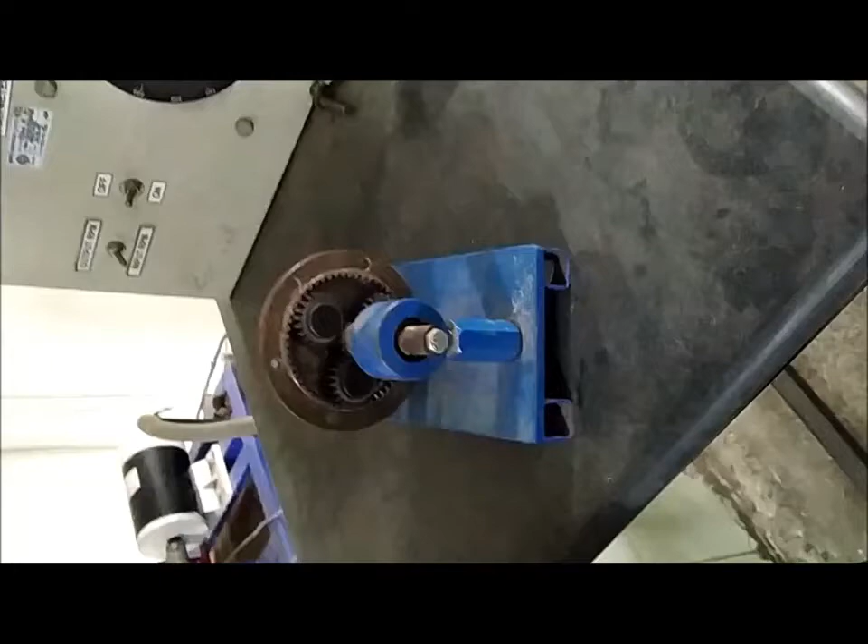Okay, this is the setup of an epicyclic gear train. There are two shafts. One shaft is here, another shaft is here. This shaft is supported in this bearing, and this shaft is supported in this bearing.

Okay, now we will separate it to understand the arrangement. So I will remove this nut.

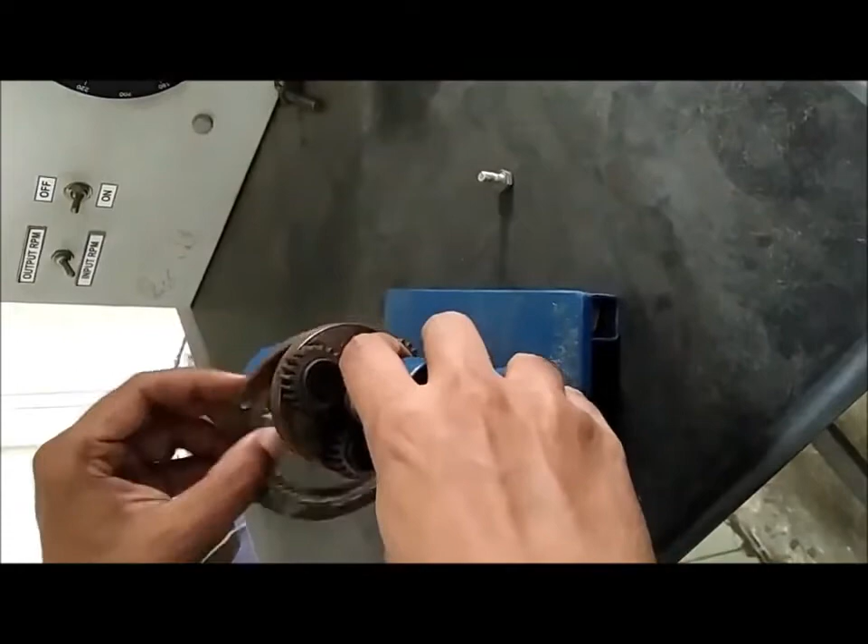So this shaft is supported in this journal bearing. Okay, I can take it out. So it is supported here, and this gear is the sun gear.

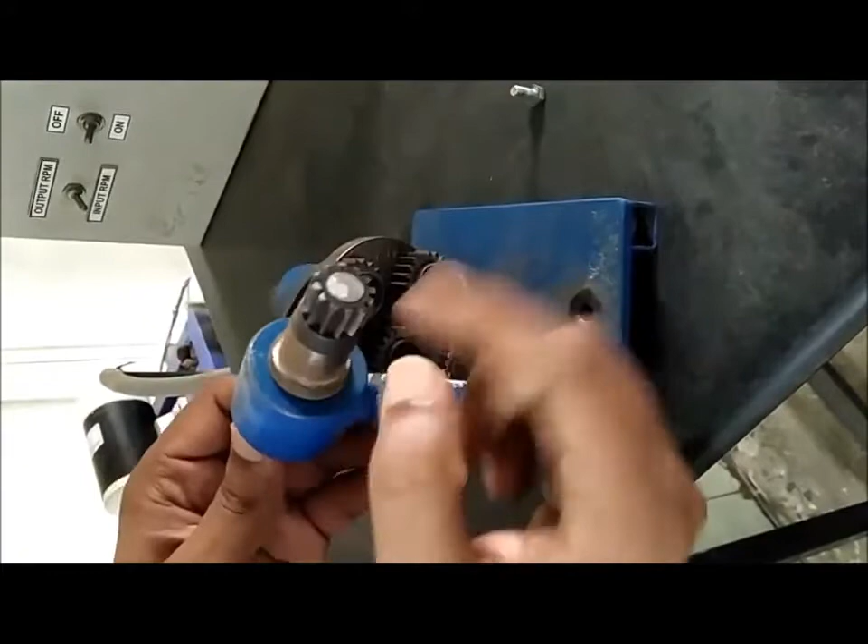Whenever this shaft rotates, that sun gear will also rotate, because the sun gear is mounted on this shaft with the help of a key and keyway. The key is there, the keyway is there, and this part is also having a keyway.

So we will mount it. Whenever this shaft rotates, this gear, which is the sun gear, will also rotate.

Now we'll focus on this remaining part. This shaft is mounted in this journal bearing, and it can turn like this. So I will take it out.

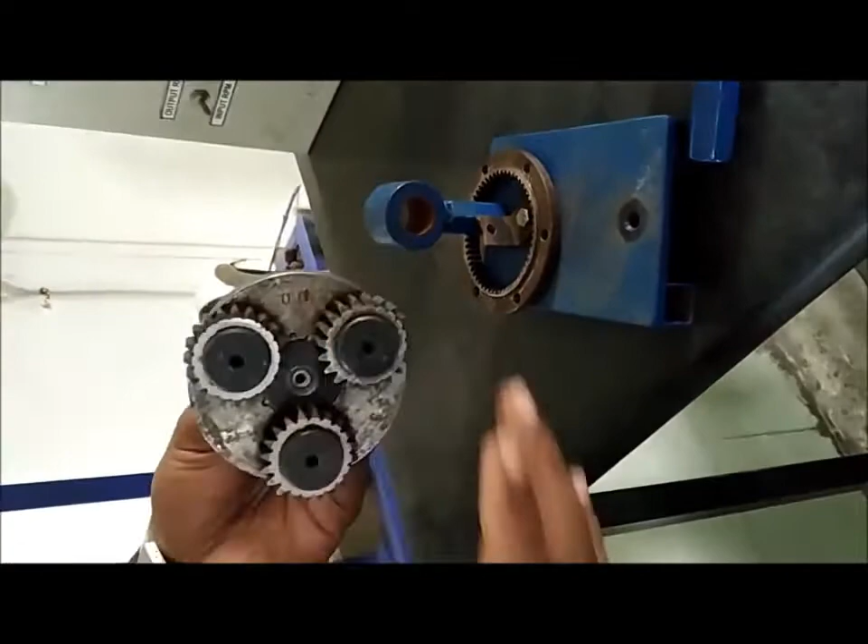Now you can notice, what is this part? This is the arm, or planet carrier.

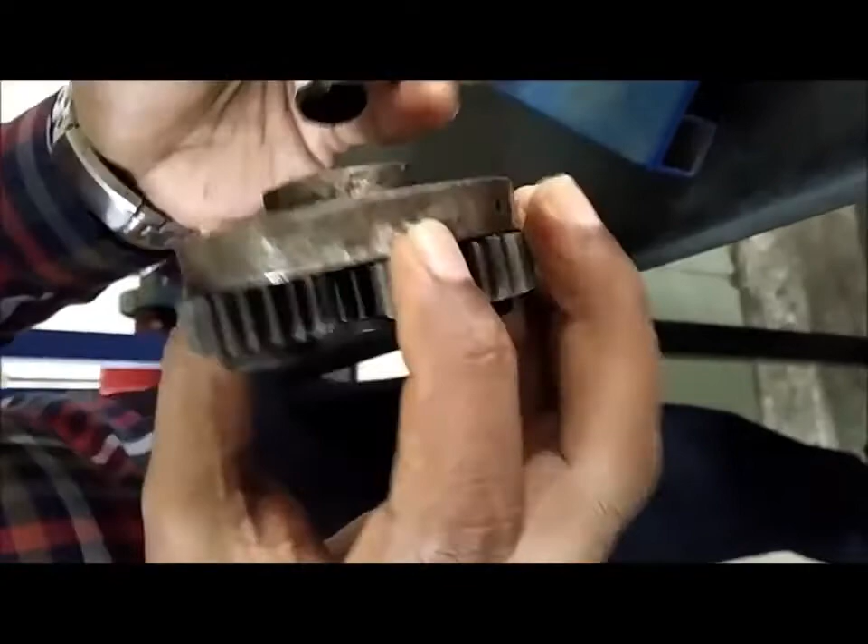How is it mounted on this shaft? With the help of a key and keyway arrangement. This shaft has a keyway and a key is inserted, and this arm or carrier also has a keyway. So this is how the arm or planet carrier is mounted on this shaft.

These are planet gears. What does this disc represent? This disc is part of the arm or planet carrier. There are 3 planet gears which can turn freely on the pin.

So we can notice this arrangement. Planet gears can turn freely on the pin of the arm, and the arm is mounted on this shaft, which is supported in this bearing.

So what kind of arrangement are we having? This sun gear will mesh with the planet gear, and these planet gears are going to mesh with this ring gear.

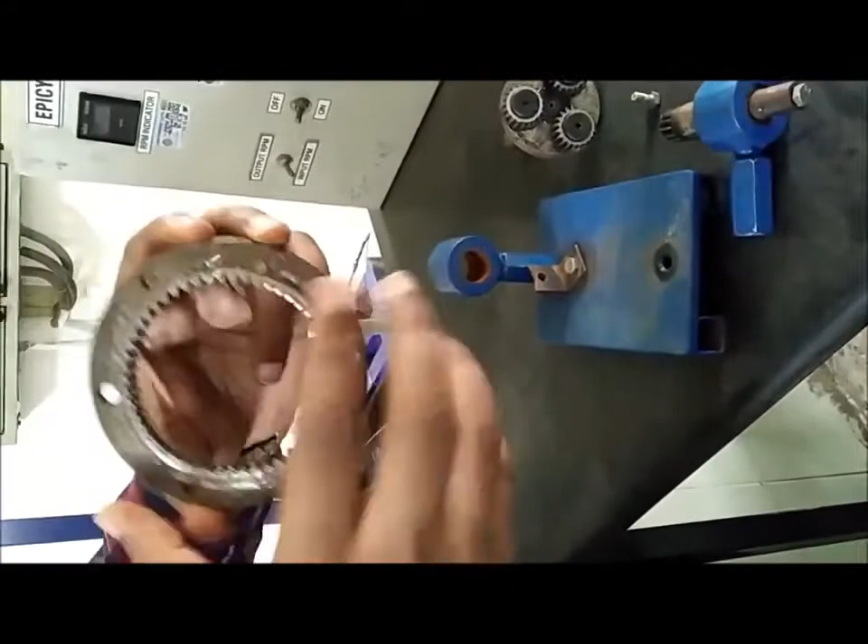This ring gear has internal teeth, you can notice them, and this ring gear will mesh with the planet gears. At the center there will be the sun gear. So the arrangement will be like this.

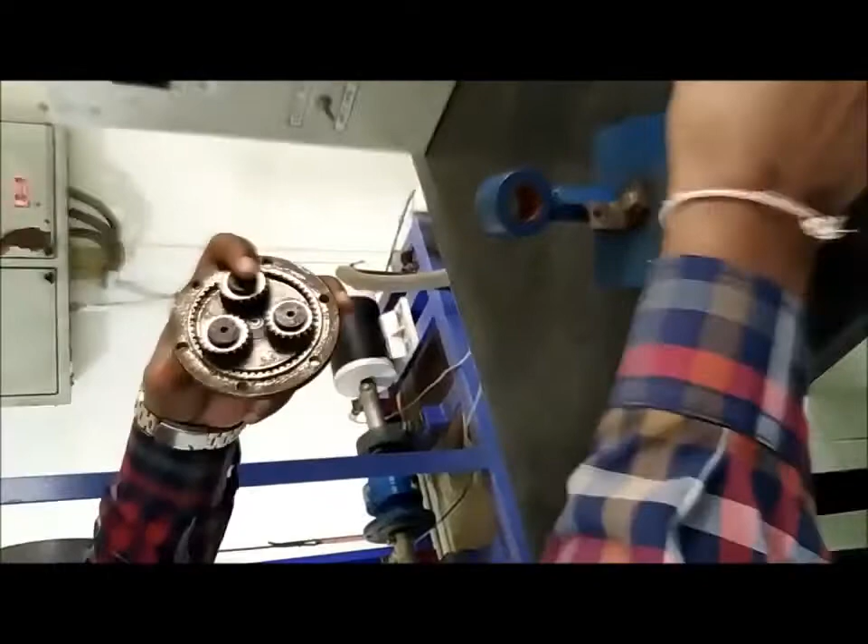Now we will mount this arrangement. Once again, just observe it properly. This is the arm or planet carrier, shaped like a disc, which has 3 pins, and on those 3 pins the planet gears are mounted. These planet gears can turn freely.

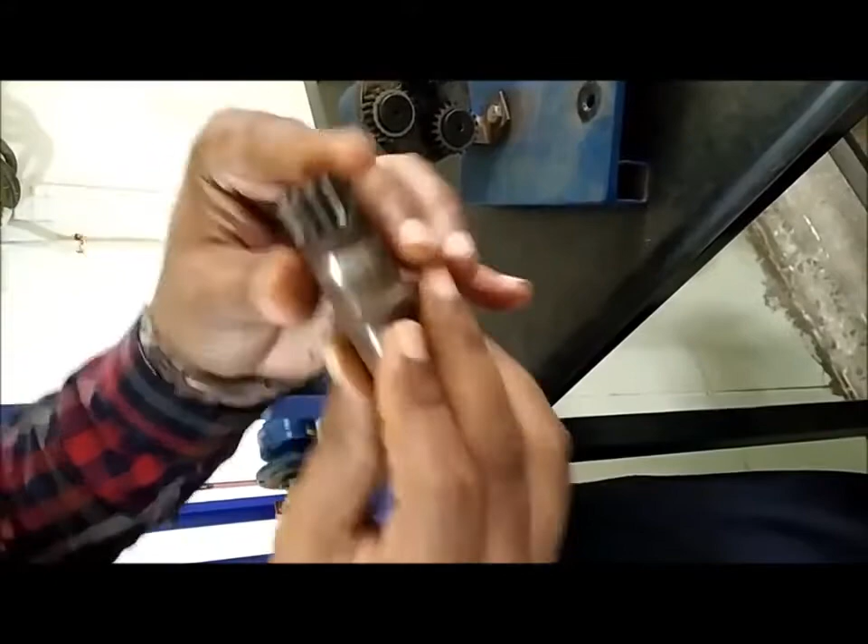Now I am going to mount this shaft in this journal bearing, and now we will focus on another shaft. Here, this is the sun gear. It is mounted on this shaft, and this shaft will be supported in this bearing.

Before that I will also insert this ring gear here. Now I will mount it in such a manner that this sun gear will mesh with the planet gear. Now I will mount this arrangement.

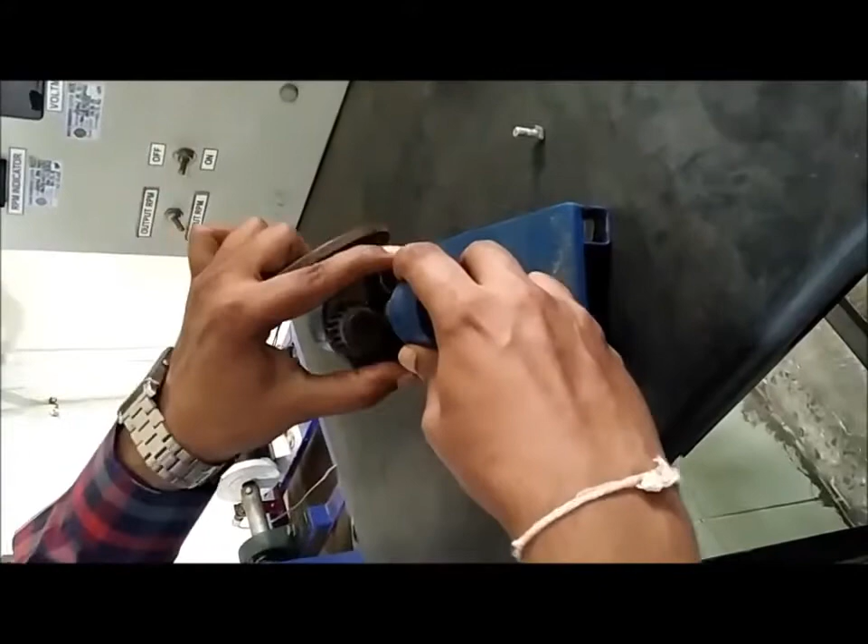Okay, wait. The sun gear is mounted on this shaft. Wait a minute. This sun gear is going to mesh with the planet gear, and now I will tighten this support.

So the arrangement is like this. The sun gear is mounted on this shaft. It is meshing with the planet gears. The planet gears are mounted on the arm or planet carrier, and this ring gear will mesh with the planet gears.

Just a minute. So this is the basic arrangement of the epicyclic gear train used in the setup. You can notice this ring gear has through holes on the periphery.

Here is a hole, here a hole is there, here also a hole is there. So like this, how many holes are there? 6 holes are there on the periphery of the ring gear.

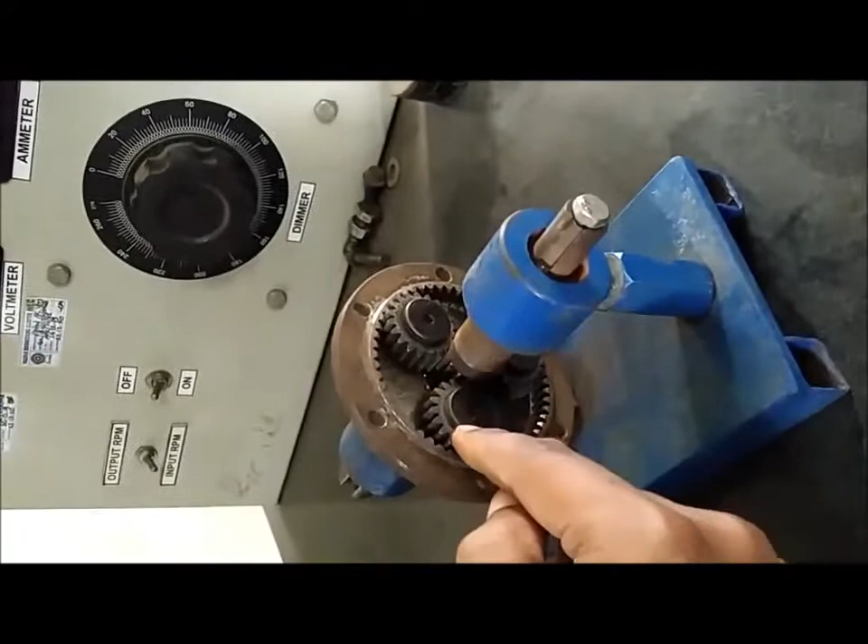Okay, so I hope the arrangement is clear. So once again, the sun gear is mounted on this shaft. These 3 planet gears are mounted on the pins of the arm. Where is the arm? The arm is this disc which is mounted on this shaft.

The sun gear is meshing with the planet gear, which is meshing with the ring gear. This is the basic arrangement. So this is our setup of an epicyclic gear train. We will come here. You can notice the arrangement.

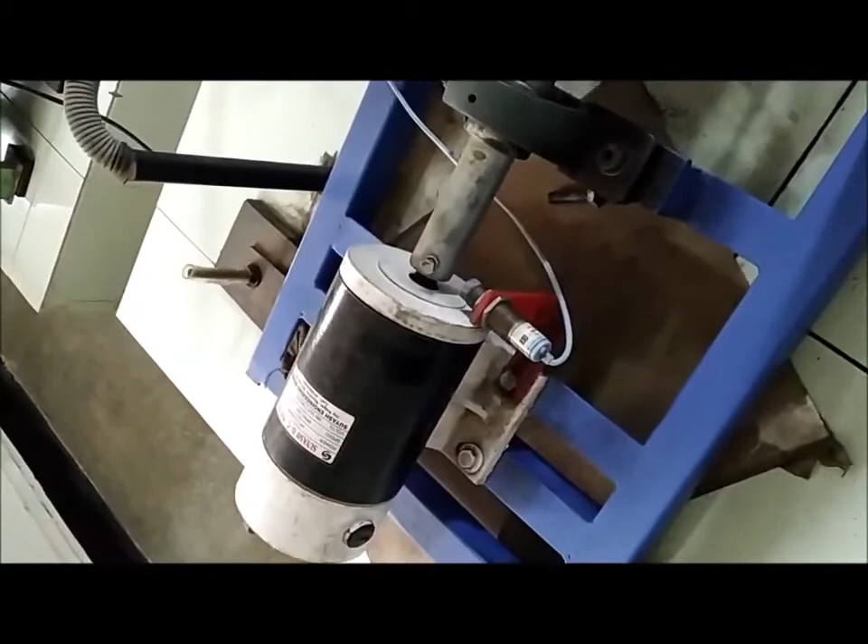Okay, so in this setup, here you can notice there is a motor, and the shaft of the motor is connected to this gearbox. Now, this is an epicyclic gearbox. How can we say it is epicyclic? Because we have already seen this kind of arrangement previously.

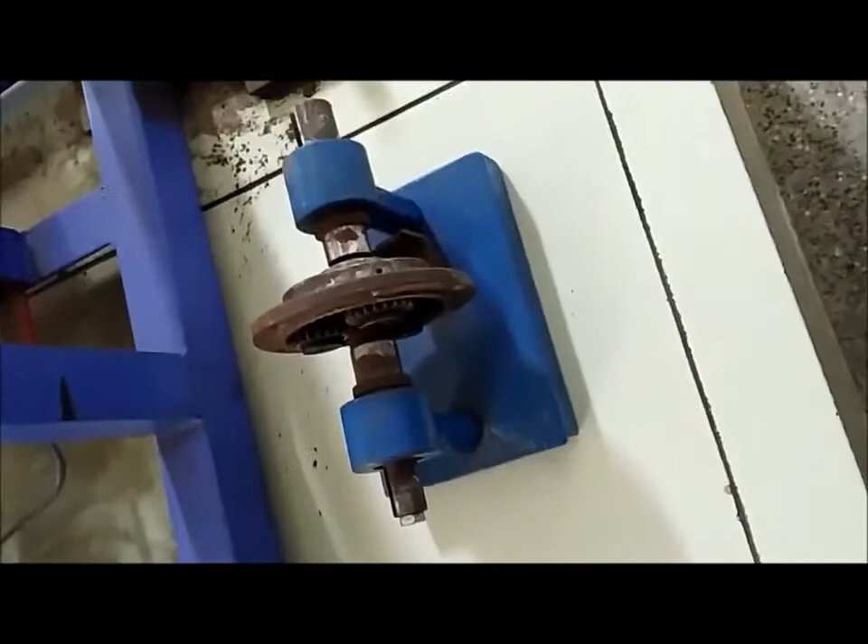On this shaft there is a sun gear. The sun gear is meshing with the planet gear, and the planet gears are meshing with the ring gear, and the ring gear is mounted here. In that arrangement ring gear was here, but in this gearbox, where is that ring gear?

At the center you can notice this thickness. At the center there is a part, and here also you can notice this thickness. This thickness and this thickness are the same, meaning this ring gear is here.

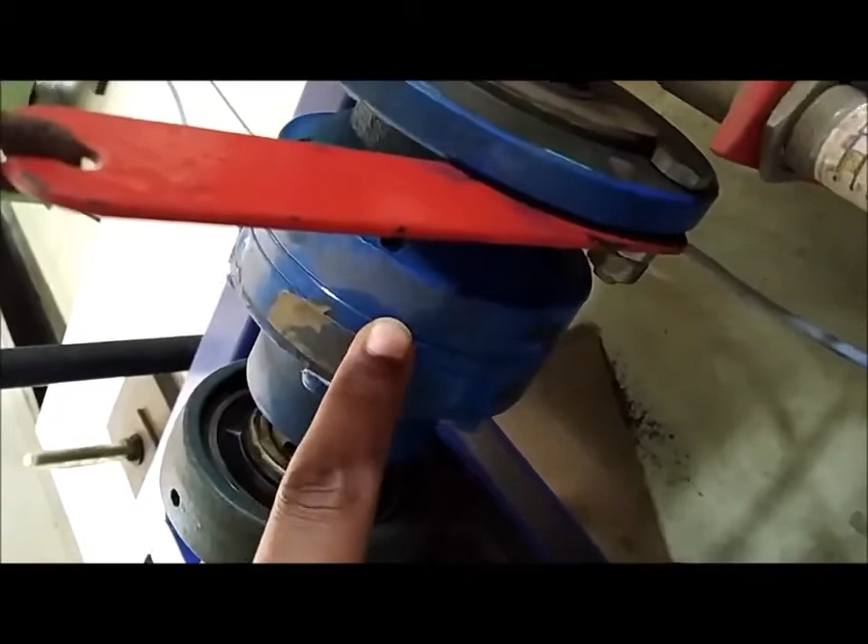And it is sandwiched between two parts of the casing. This part of casing is there, this part is also there. So there are two separate parts of the casing.

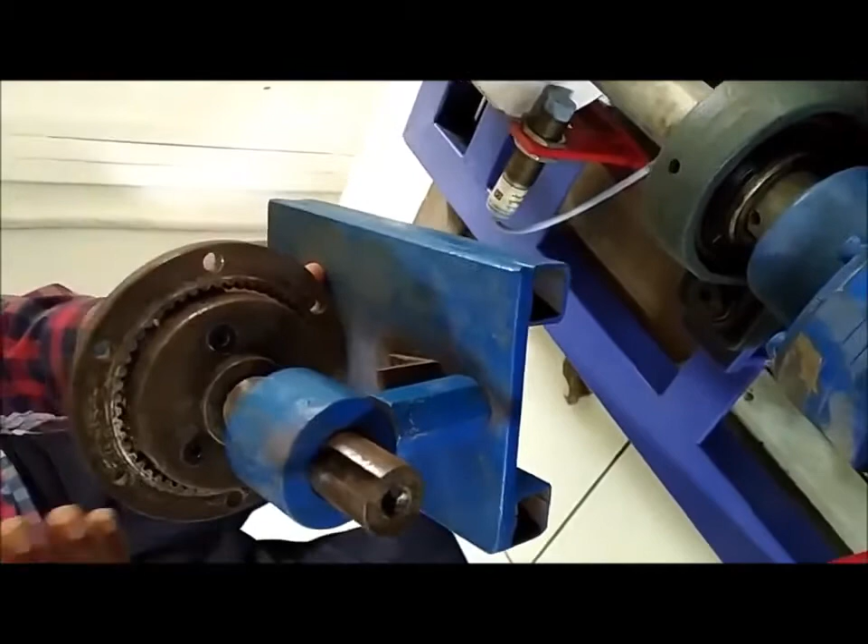We have already seen that this ring gear is having through holes at the periphery, just like a flange-like arrangement with through holes. How many holes are there? There are 6 holes, we have already seen it.

Now the same ring gear is here. It is sandwiched between two parts, and these two are the parts of the casing. Here you can notice there is a bolt. How many bolts are there? 1, 2, 3 - if you observe properly, there are 6 bolts.

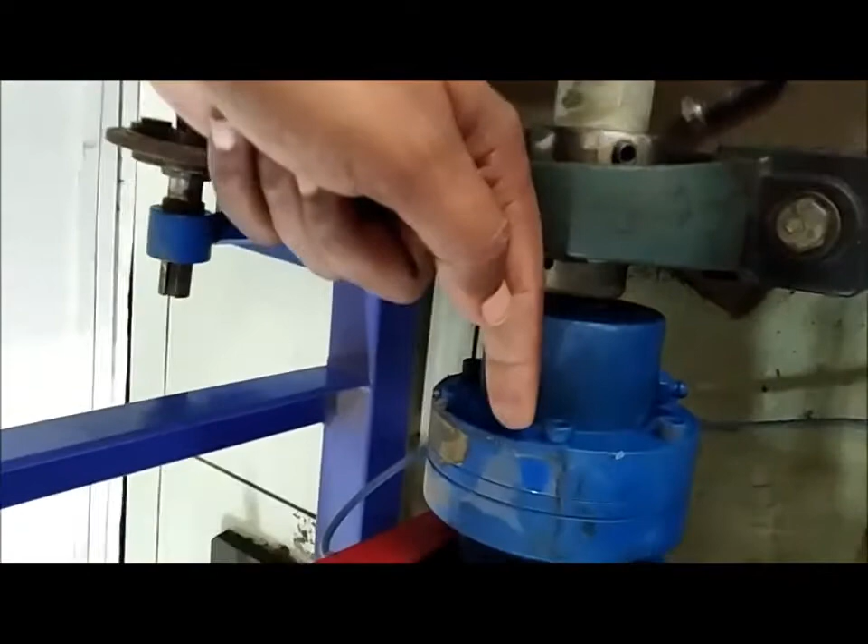Now how is this arrangement? The bolt is inserted, so first it will pass through this part of the casing, then it will pass through the ring gear, then that bolt will pass through the next part of the casing. So like this, how many bolts are there? There are 6 bolts.

Now try to understand the arrangement. What will happen due to that, with this ring gear and this casing? What is the purpose of this casing? The casing is there because we can insert some lubricant inside it, and that casing is connected to the ring gear, meaning relative motion between ring gear and casing will be zero.

Why will it be zero? Because the bolt is directly inserted through the casing, through this ring gear, and through another part of the casing. And you can notice the same part continues here, and this part is also having a number of holes. How many holes are there? There are 4 holes.

So in this arrangement, if we fix this casing, what will happen? The ring gear will be fixed.

Now try to understand the arrangement. The same arrangement is there, we have already observed this setup. The sun gear is mounted on this shaft. So here also this sun gear is mounted on this shaft. Here also we have a motor, and this motor has its shaft connected to the sun gear.

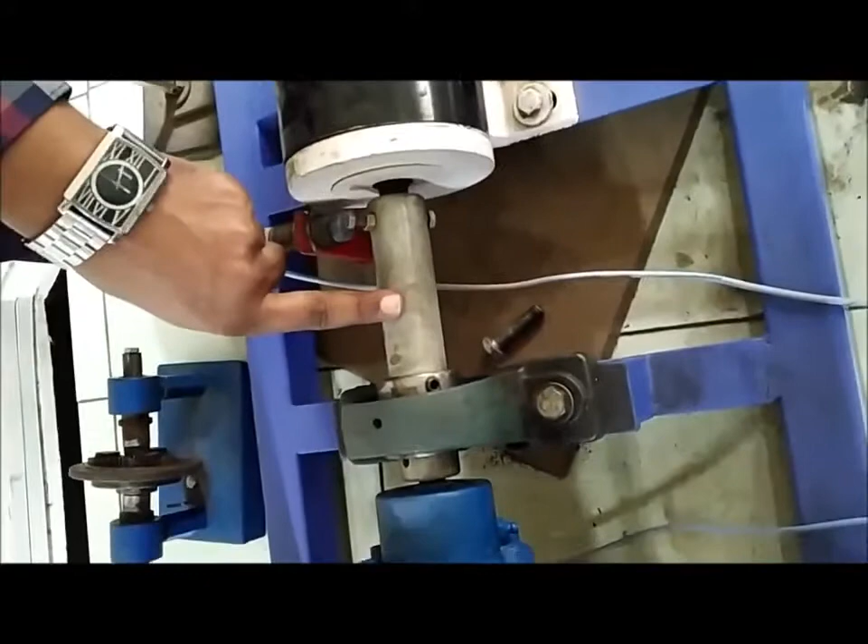Where is the sun gear? It is not visible, because right now this entire arrangement is inside the casing, so that's why we cannot see it. But the sun gear is mounted on the motor shaft, meaning we have given input motion to the sun gear.

The sun gear is meshing with the planet gear. How many planet gears are there? There are 3 planet gears in this setup, and those 3 planet gears are mounted on the pin of the arm, and the arm is mounted on this shaft.

And where is the ring gear? The ring gear is here. The ring gear is connected to the casing, and we are going to fix the casing. To fix the casing, we have this arrangement.

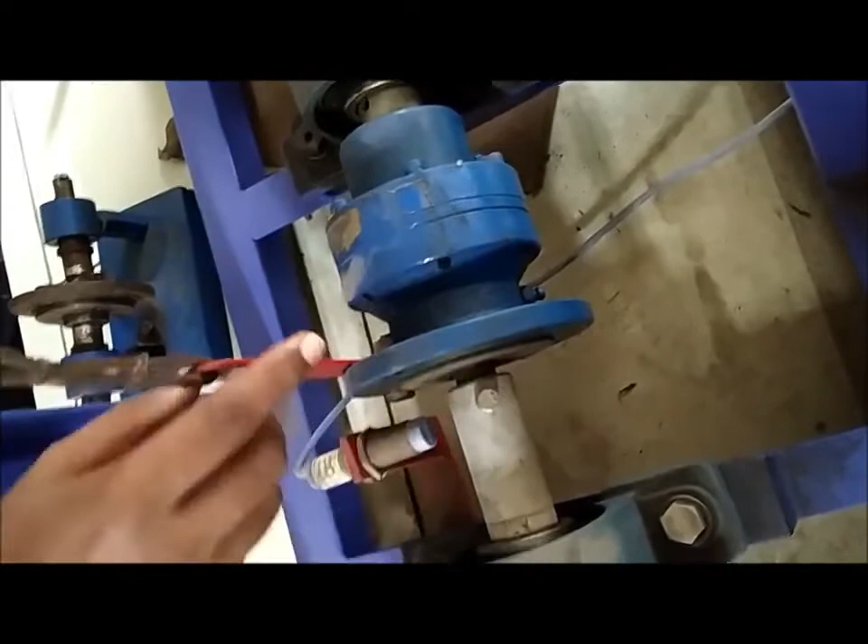So what will happen when the motor starts? You can notice this part of the casing is connected to this link, so that part will also try to turn, but as it is connected here, and this part is connected to one dial, and this part is connected to the frame, this will not rotate. This casing will not rotate, so in turn, the ring gear will not turn.

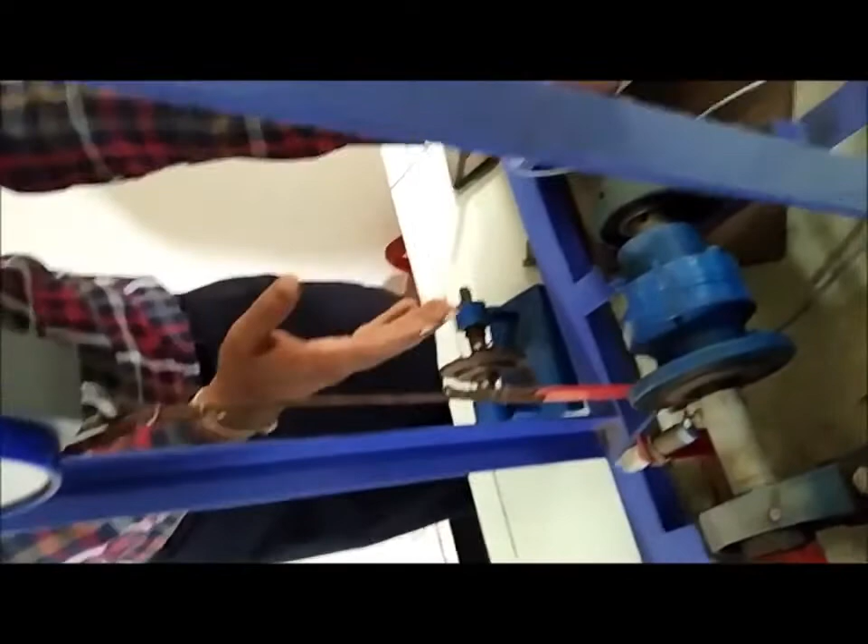Okay, so once again, a basic arrangement. Where is the sun gear? The sun gear is mounted on the motor shaft. Where is the arm or planet carrier? The arm or planet carrier is mounted on this shaft, and on the same shaft there is a drum. Where is the ring gear? The ring gear is here, so in this arrangement we are going to fix the ring gear, and that's why we have this arrangement.

Okay, so now we will observe this panel. This is a 2 position switch. Now it is off. I will move it in downward direction. Now you can notice that the motor is rotating.

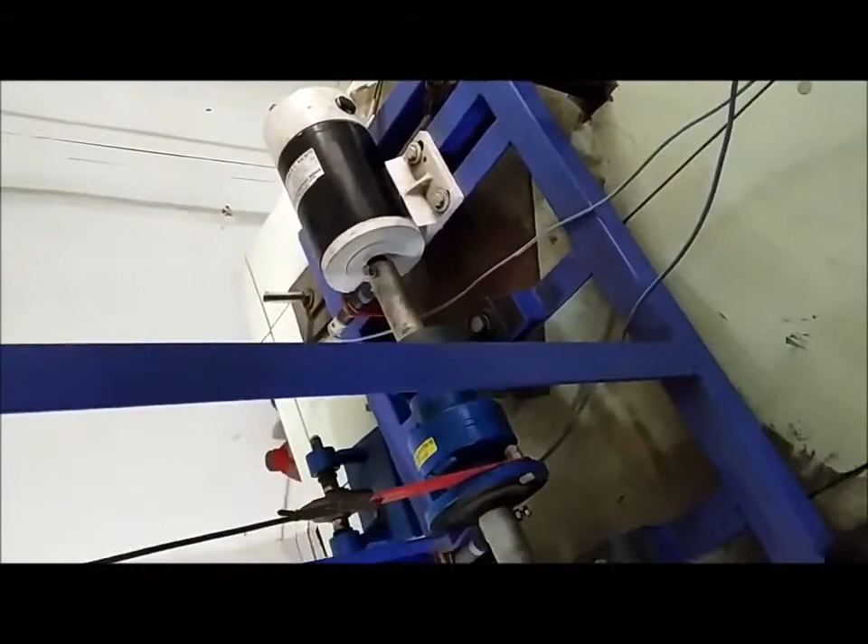Yes, the motor is rotating, and the output shaft is also rotating, both at different speeds, as you can notice. Even if it's not obvious by observation, it will be clear from the reading. This is the dimmer knob, so we can increase voltage, and you can notice the speed is increased.

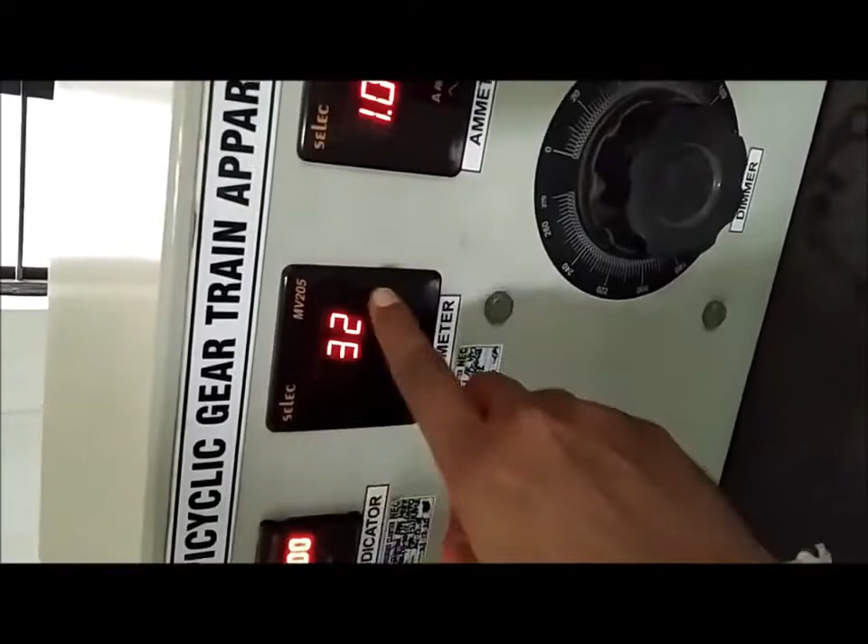Now from this voltmeter we will get information about voltage, how much voltage the motor is having, and how much current is there. So that information we can have from this panel.

Now you can notice one more panel here, the RPM indicator. From this display we will get information about RPM, but how will we get that information?

You can notice there is a switch. It is a 3 position switch. Now it is at the center position. If I move it in downward direction, now you can notice we are getting some speed, and it is the speed of the input shaft. Now how it is working, you can notice this light is blinking.

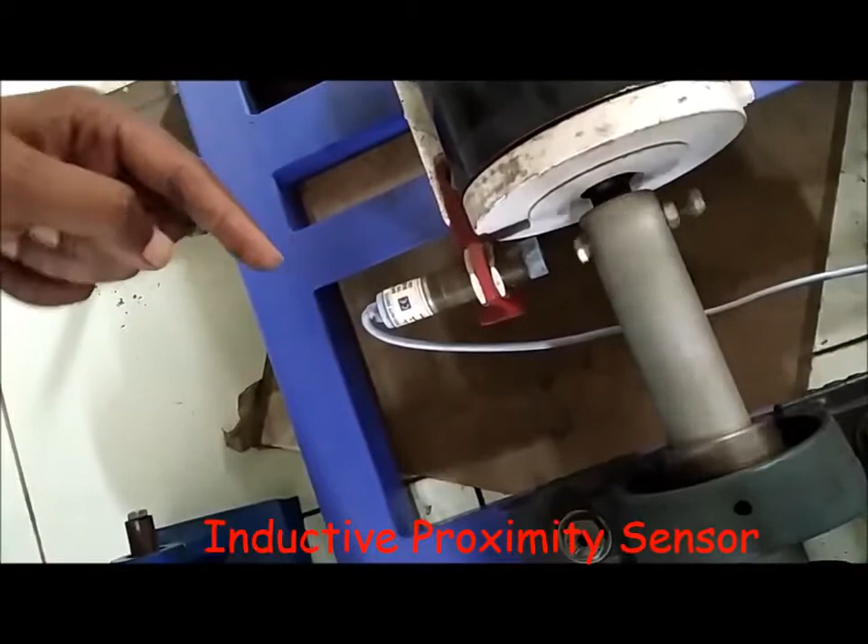It is a proximity sensor, and on the shaft there is a bolt. So whenever that bolt crosses, whenever that bolt passes in front of that sensor, this light will blink. And this arrangement is used for measuring speed.

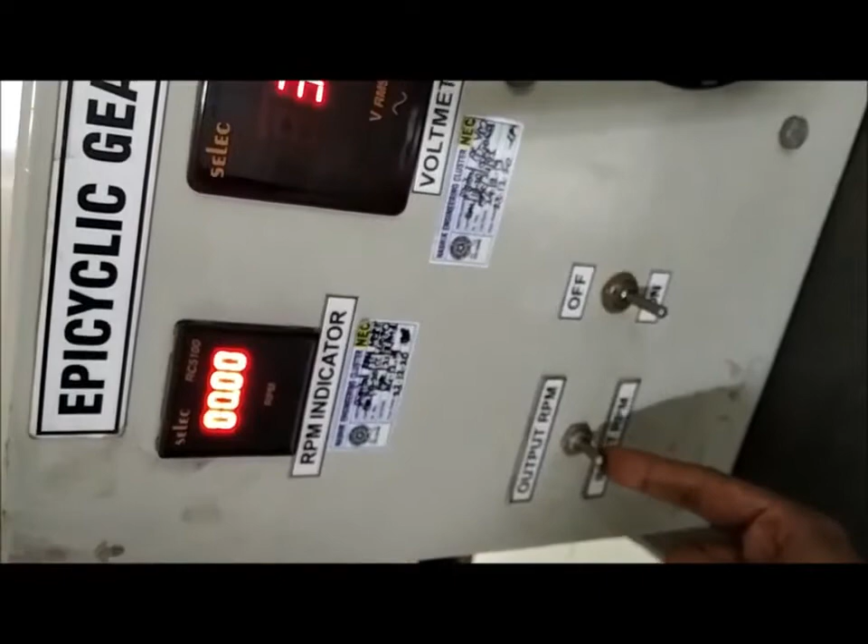If we want speed at output, we will move this switch here. Now here speed is 0. Why is it 0? Because now it is at the center position. Now we will move it in upward direction. Now here we should get speed at output. You can notice 45 RPM is the speed, and it is the speed at output.

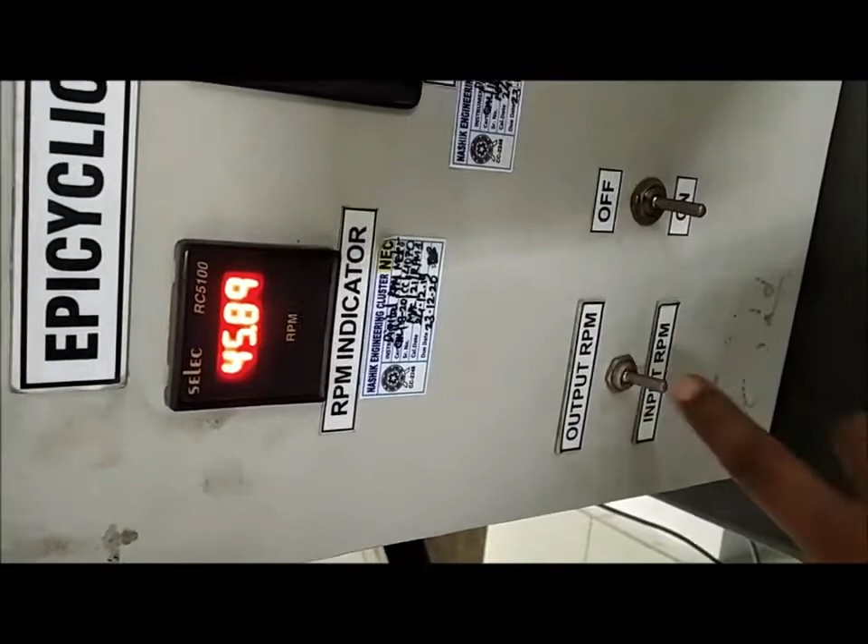You can notice here we are having a proximity sensor. Whenever that bolt crosses that sensor, this light will blink, and this information of speed is displayed here. Now you can notice speed at output is 45 and speed at input is...

Sorry, not 147, it is 255.6. Here also you can notice by observation, input shaft is rotating faster than output shaft. Yes, input shaft is rotating at higher RPM, but output shaft is rotating very slowly.

So why is this variation there? Now you can notice whether this casing is rotating. No, that casing is not rotating, it is fixed. Input is given to the sun gear, casing is fixed, and output is taken from the arm.

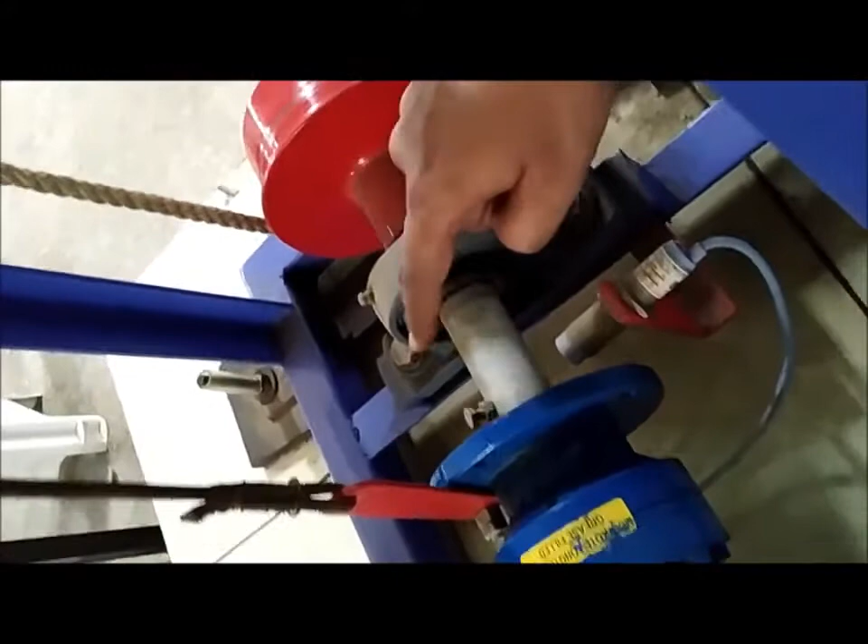So this is the arrangement, and on the same shaft, what is this shaft? This is the shaft on which the arm is mounted. Now you can notice on the same shaft there is a drum. So you can observe this drum. So this drum is here.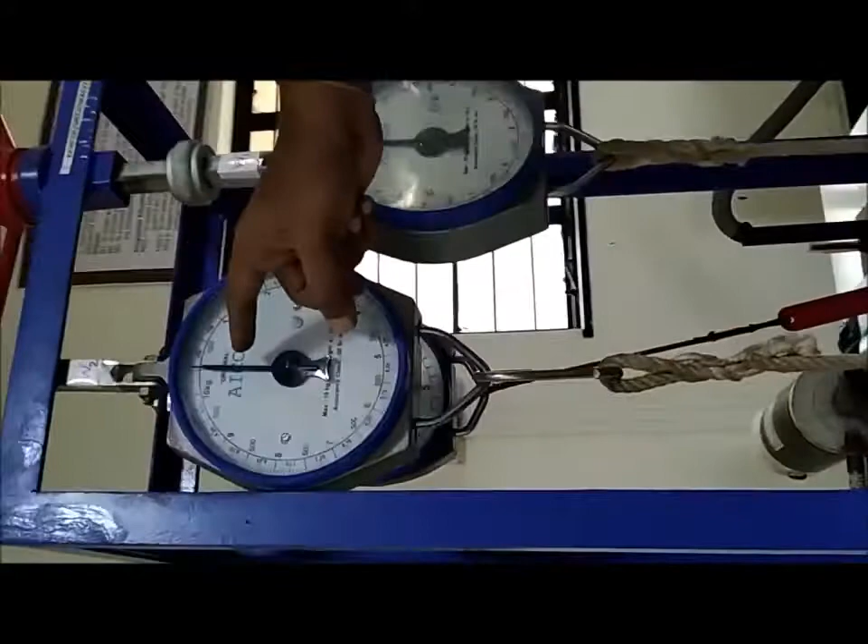And you can notice there is a rope. One end of the rope is connected to this dial. This rope is wrapped around this drum. Another end of the rope is connected to this dial, and this dial is connected to the frame. Now here you can notice what is written, W1, meaning from this dial whatever reading we get, we will use the notation W1. And from this other dial whatever reading we get, we will use the notation W2.

So where is this drum mounted? This drum is mounted on the output shaft. And where is the output shaft? The output shaft is that shaft on which the arm or planet carrier is mounted.

So how can we get torque at output? Obviously this rope arrangement is there, the drum is there. So whenever we operate this nut, now you can notice this dial is connected to this part. This part is having thread, and here a nut is there. This red color part is the nut, and we can turn it.

And whenever we turn this nut, you can notice what will happen. This part is moving, moving in upward direction. So what will happen to the rope? The rope will be pressed against this drum, and here we will get some reading.

Okay, so this is how we can have W1 reading and W2 reading. By using these readings, we can find out output torque. How to find it, that we will discuss.

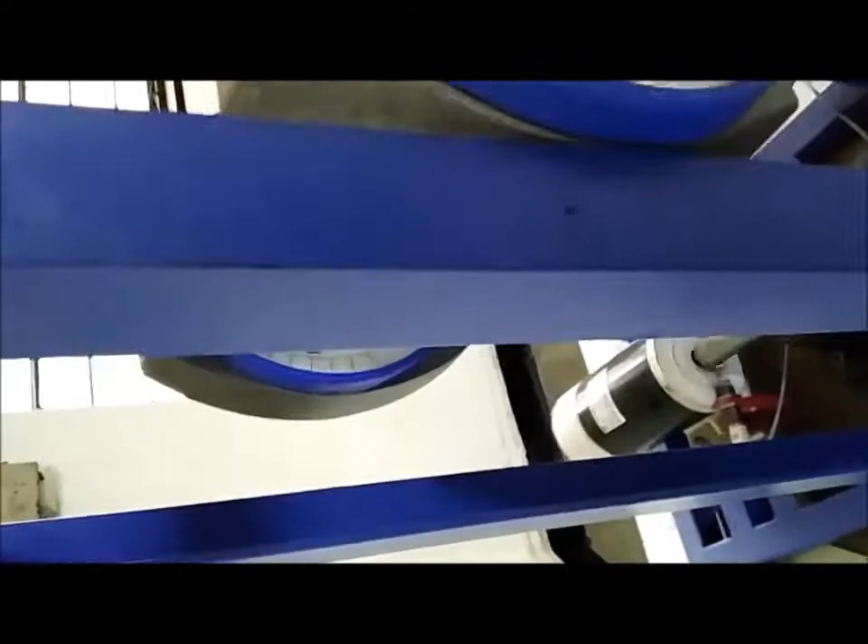Now here you can notice one more dial is there. This dial will give us reading S. So whatever reading we take from this dial, for that we will use notation S.

Now from where we are getting that reading, you can notice there is a string, and it is connected to this link, and this link is connected to this part. And where is this part? This is actually part of the casing. And we know whatever speed the casing has, the ring gear will have the same speed. Now due to this arrangement, casing cannot turn, meaning the ring gear is fixed. For that we are having this arrangement.

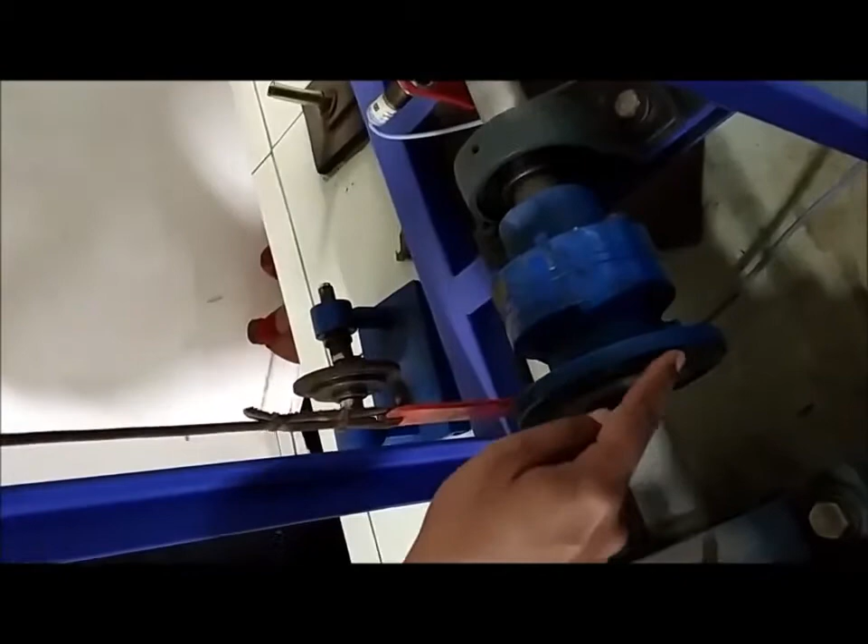In reality, the ring gear or this casing will be connected to structure, will be connected to a fixed link or will be connected to ground. But here, as we are interested in the reading of holding torque, that's why we have this next part to which this red color link is connected, with the help of a bolt. So due to this, the casing cannot turn. And how much tension will be there in this, or how much force will be there, that information we are getting from this dial, and for that we are using notation S.

So the title of this experiment is Speed and Torque Analysis of Epicyclic Gear Train to determine holding torque.

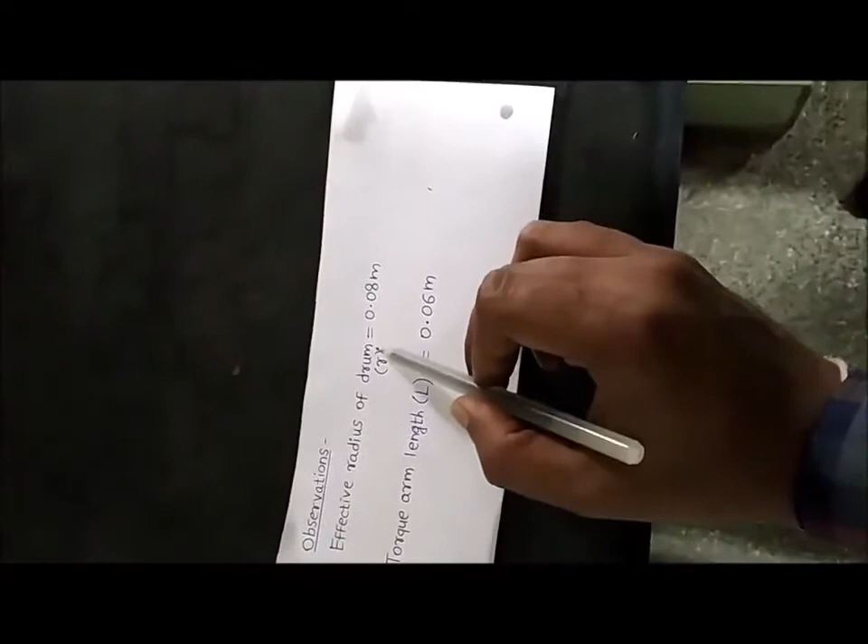Now we will go for observations. Here effective radius of drum is written, and for that the notation used is small r, and it is equal to 0.08 meter.

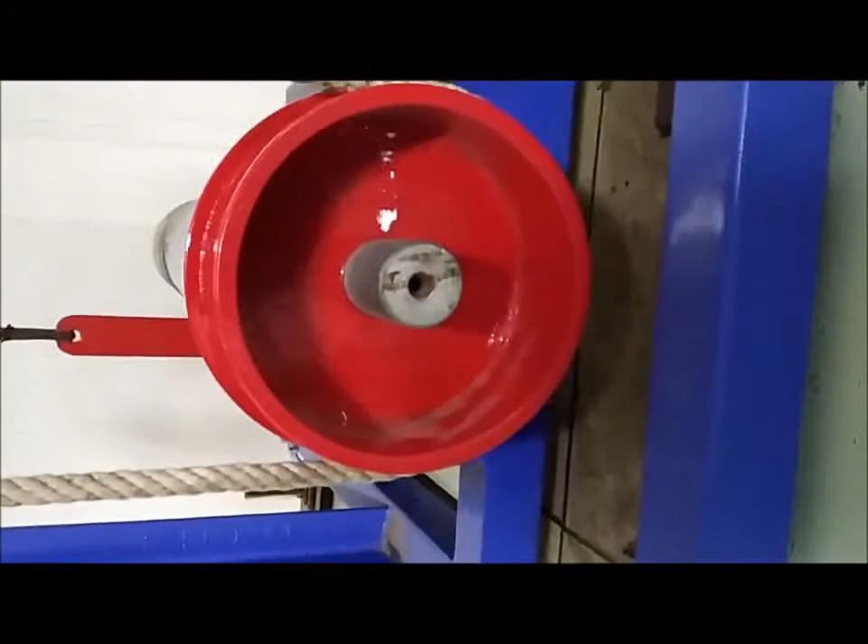Now it is the radius of which drum? In the setup, we have already seen this drum is there. It is mounted on the output shaft, so this is the radius of this drum. So what we have written, effective radius of the drum, means it will be radius of drum plus radius of this rope. So that total distance is given, and how much is it? So what is effective radius? Radius of this drum plus radius of this rope, and it is 0.08 meter. Now next term is also there, torque arm length, for that notation used is L.

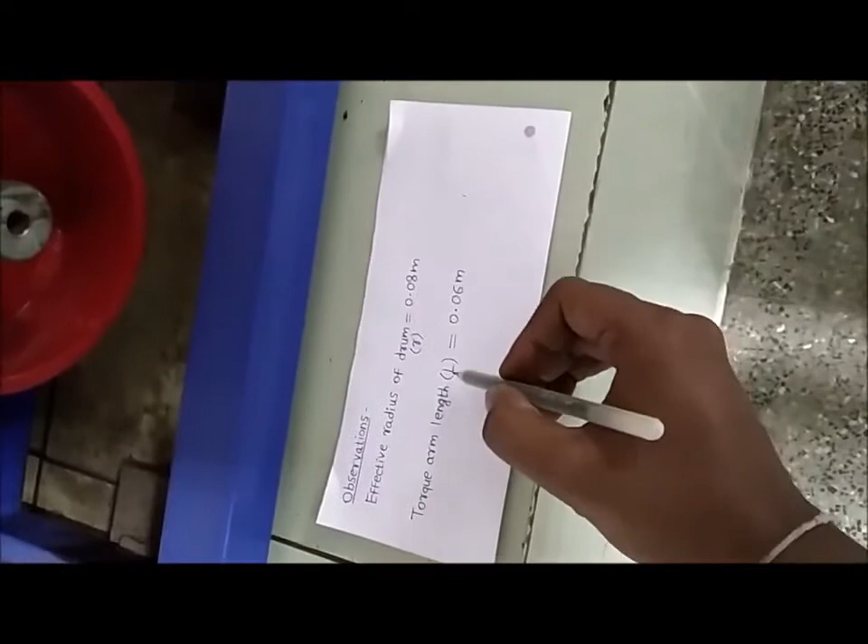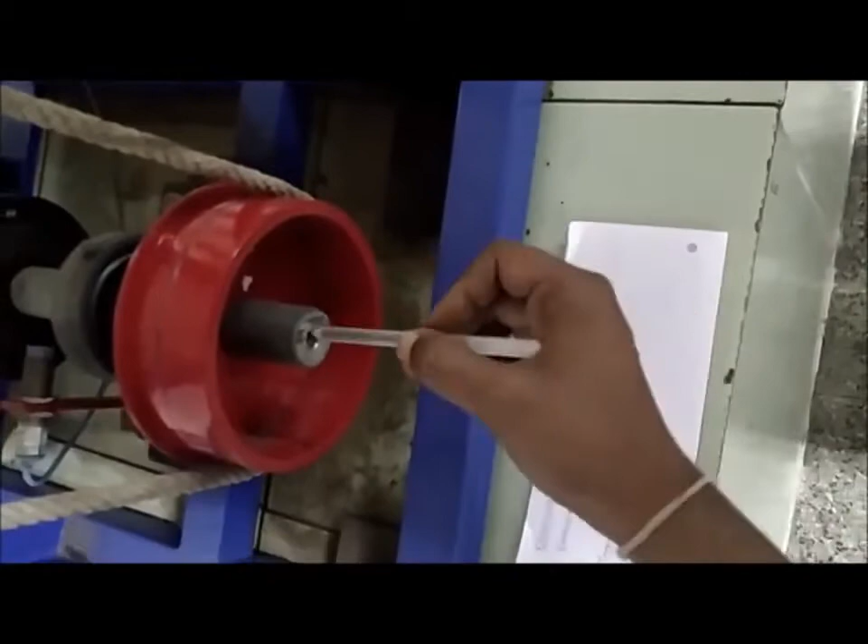And it is 0.06 meter. Now it is in meter, and previously what we have seen, effective radius of drum, it is also in meter, meaning in centimeters it will be 8 centimeters. So this radius, effective radius of drum, will be 8 centimeters, 0.08 into 100 means in centimeter it will be 8 centimeters. So torque arm length, for that we have used notation L, and it is 0.06 meter.

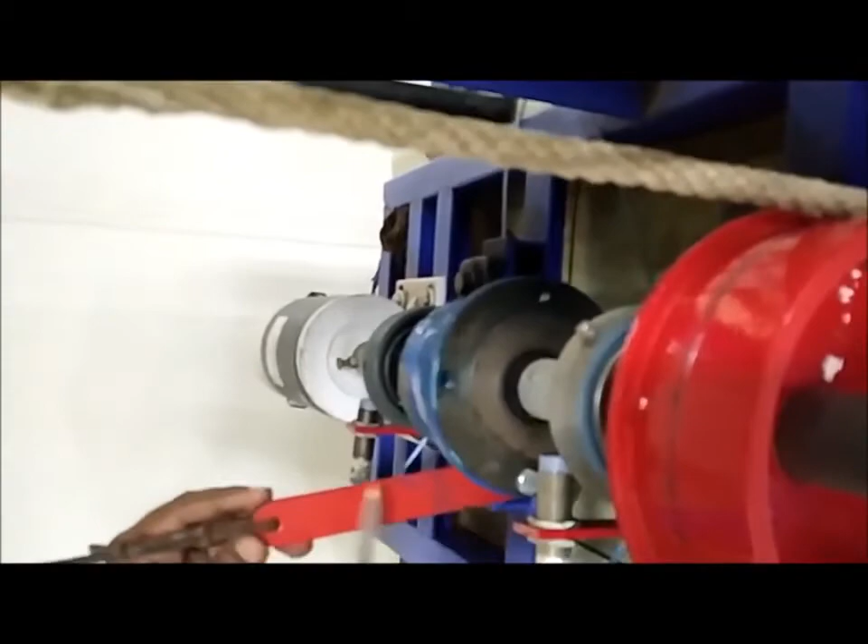Now where is that distance? Now we will observe it. Here there is an axis. This entire arrangement has one axis of rotation, and you can notice there is a link, red color link. It is connected to this string, and this string is connected to this dial, and from this dial we are going to take reading, for which we are going to use notation S.

Now where is this link connected? It is connected to fixed casing. Now why am I saying it is connected to fixed casing, because due to this arrangement, this casing cannot turn, and as the casing will not turn, the ring gear will also not turn.

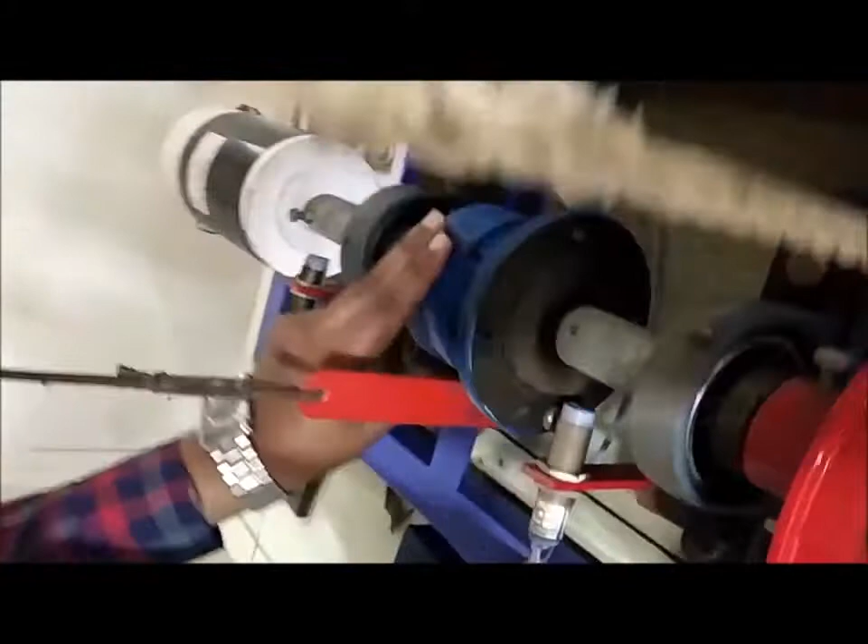So what is that torque arm length? It is the distance between this bolt and axis of rotation. So how much is that distance? That distance is 0.06 meter, meaning it is 6 centimeters.

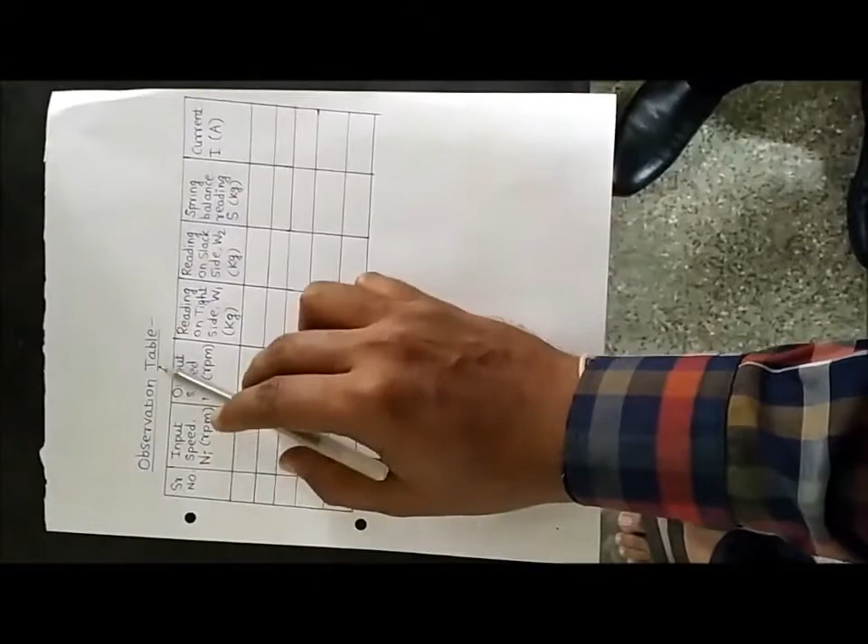Okay, now we will observe this observation table. You can notice the first column is serial number. We will take 5 to 6 readings.

The next column is input speed, for that we will use notation N sub I, and it will be in RPM. We will also measure output speed, that is our next column. For that the notation is N sub O, and it will be in RPM.

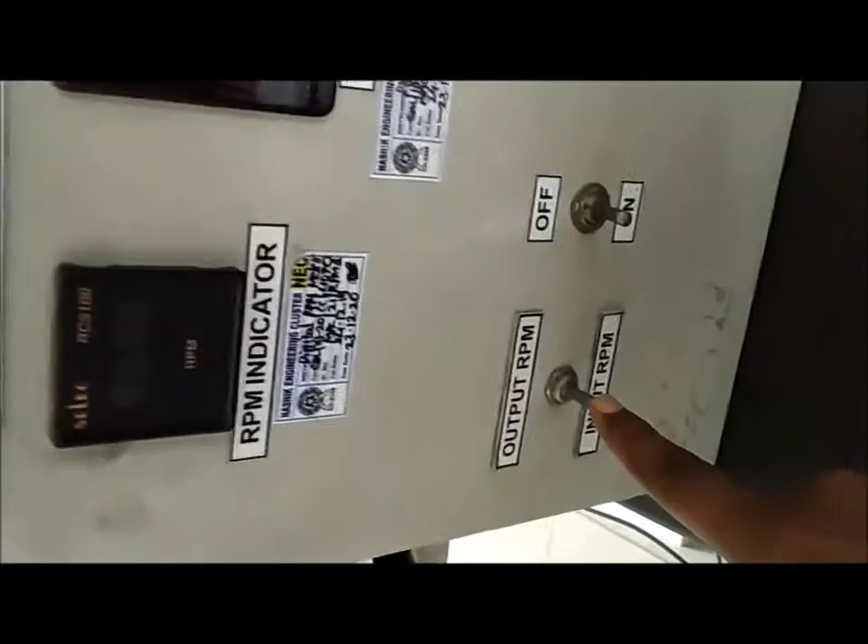So how will we measure the speed? We have already seen on this panel there is a switch. We can move it either in downward direction or in upward direction. If we move this switch downward, we will get speed at input. If we move it upward, then we will get speed at output.

In the observation table, the next column is reading on tight side. For that, the notation used is W1, and that reading will be in kg. The next column is reading on slack side, for that the notation is W2, also in kg.

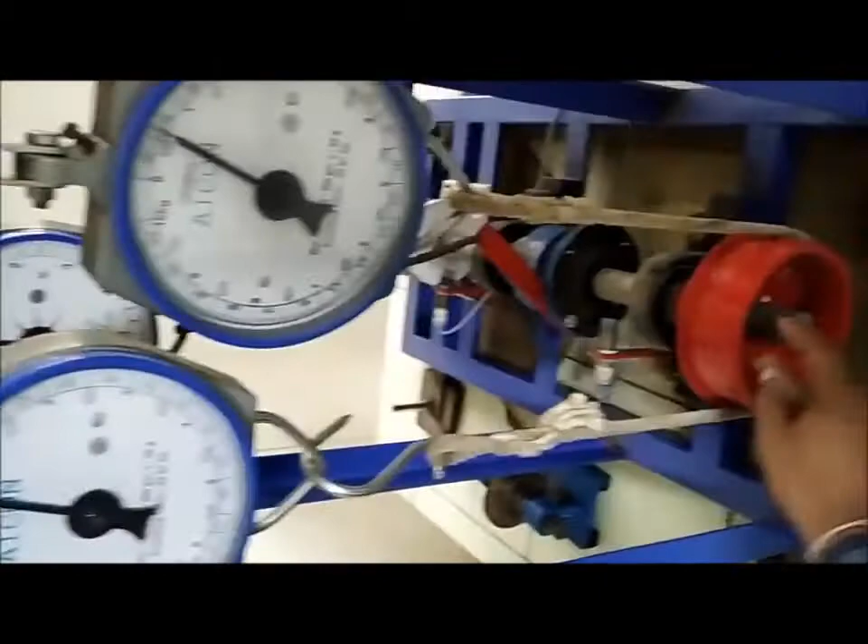Now where are we going to measure these readings, W1 and W2, reading on tight side and reading on slack side? On the setup we have already seen there are two dials. These two dials are connected to the rope, and the rope is wrapped around this drum, and the drum is mounted on the output shaft. From this dial we will get the reading for W1.

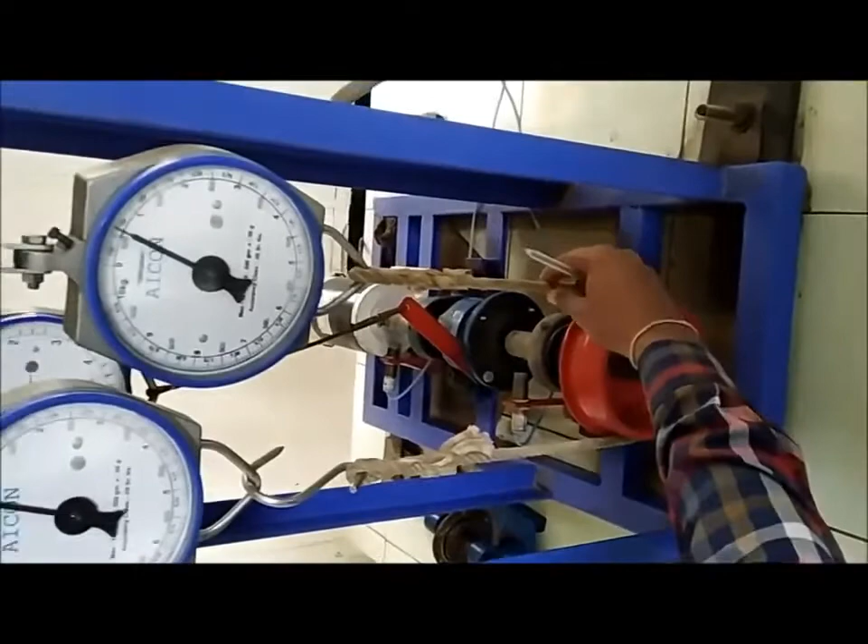Here this drum is going to turn in clockwise direction, so whatever W1 we get will be the reading on tight side. Why is it the tight side? Because the drum is rotating in clockwise sense, so obviously this will be the tight side and this will be the slack side. And here whatever reading we get, for that we use the notation W2, which is our next column, reading on slack side W2.

Our next column is spring balance reading, and for that the notation is S, and it is in kg. Now where will we measure it? There is one more dial.

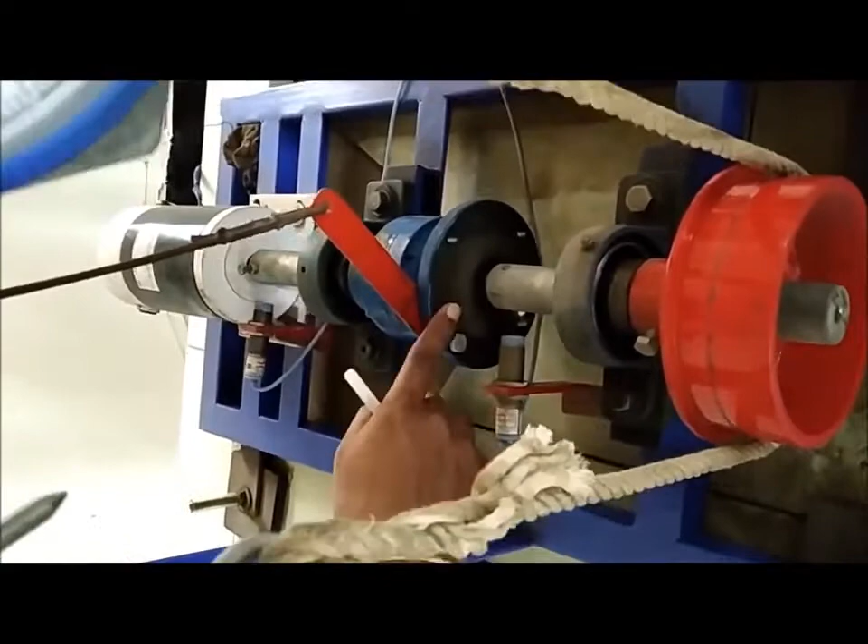We know this dial is connected to the rope, the rope is connected to the link, and the link is connected to the casing. The casing and this ring gear are just one unit, because bolts are inserted - we have already discussed it. That means whatever speed the casing has, the same speed will be there for the ring gear.

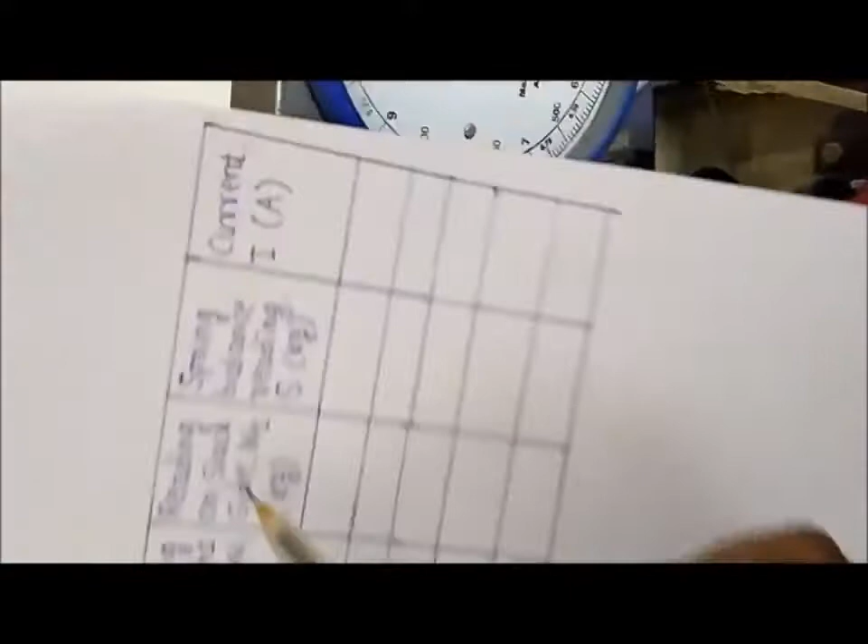But this arrangement is there to fix the casing. Due to this link, this ring gear or casing cannot turn, so it will experience some tension, or some load, and we can get information of that load here by notation S. So for that we are saying spring balance reading, notation S, in kg.

And the last column is current in ampere, and we can get that reading from this panel. Here the ammeter is, and we can get that information from here.

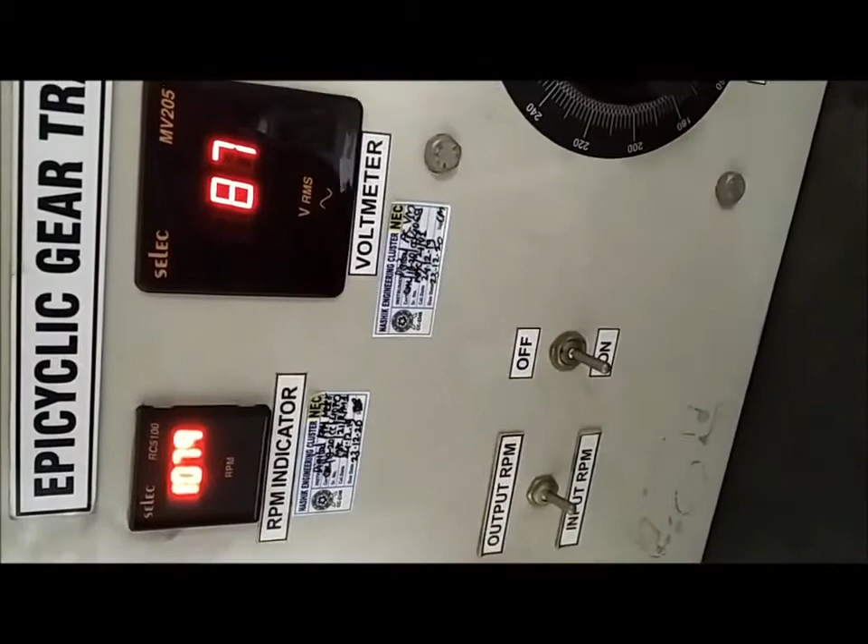Now the motor is started. Now we will observe. So our first reading is input speed in RPM. We can use this knob, move it in downward direction, and we will get input speed in RPM. To get speed at output, NO, we will move this knob in upward direction. This is how we get output speed.

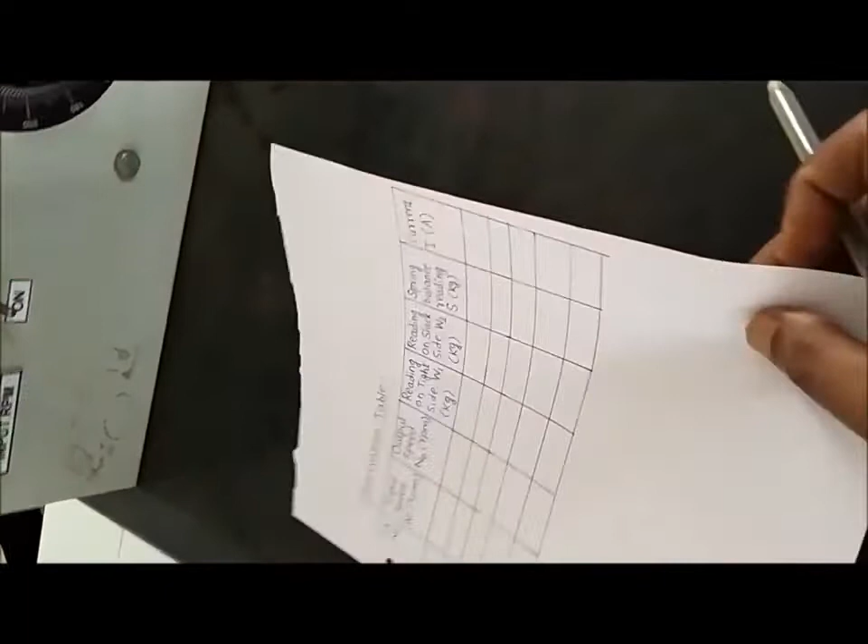Now we have to go for reading on tight side. Where are we going to get that reading? We can get that reading on this dial. But before that, we will operate this nut so that the rope will be pressed against the drum and we will have a reading.

Now, whenever I tighten it, you can notice what will happen to this casing. This is the casing. What will happen to the casing of the epicyclic gearbox, you can notice. Now I am operating this nut. Now here you can notice it has changed its position.

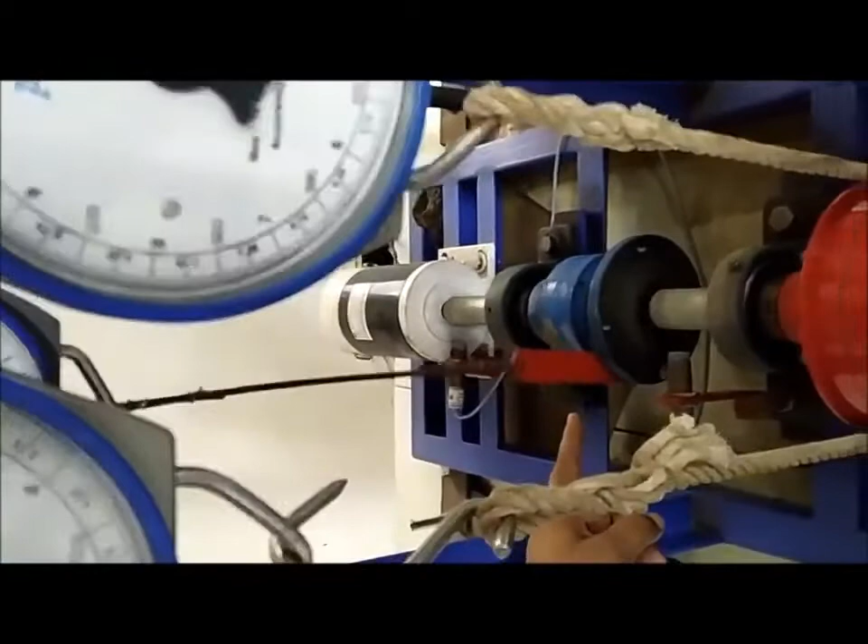Whenever we put this gearbox into some application, whenever we use it in real life, definitely the output will be subjected to some load, and due to that the fixed part will experience some load. So when we take a reading, we take it only when it changes its position, only when this casing or this link will change its position.

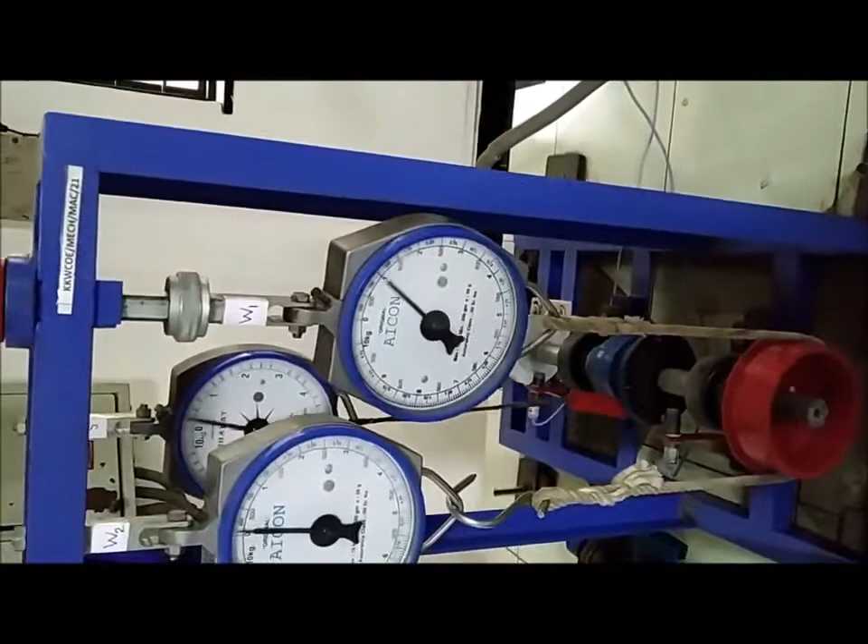Now here you can notice there are tremendous fluctuations. So what we will do, we will operate this nut. This link has already changed its position. Now we will operate this nut so that the rope will be pressed against the drum.

Now you can notice here fluctuations are comparatively less. So now we can take reading. Fluctuations are there, fluctuations will be there. Now how we will take reading? We will take value at the center. It is moving, we will take value at the center and that will be our reading.

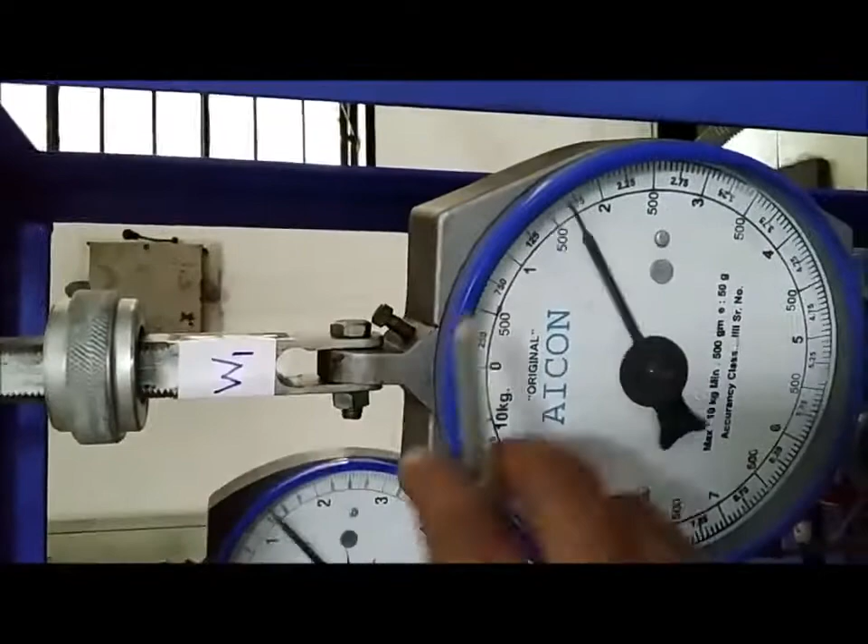Our next column is W2. From this dial we will get reading for W2, and from this dial we are going to get reading for W1. So you can observe in observation table, input speed and output speed we can take from the panel. W1 and W2 we can take from these two dials. Next is spring balance reading, which we will take from this dial.

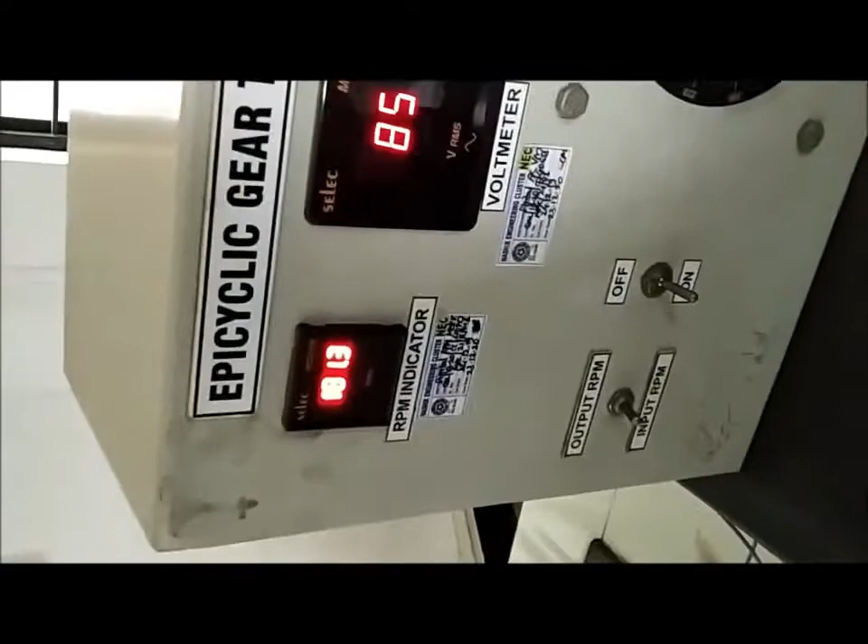And one more column is there, current in ampere. So from this display we will get that information. So this is how we will take reading. Now this is our first reading.

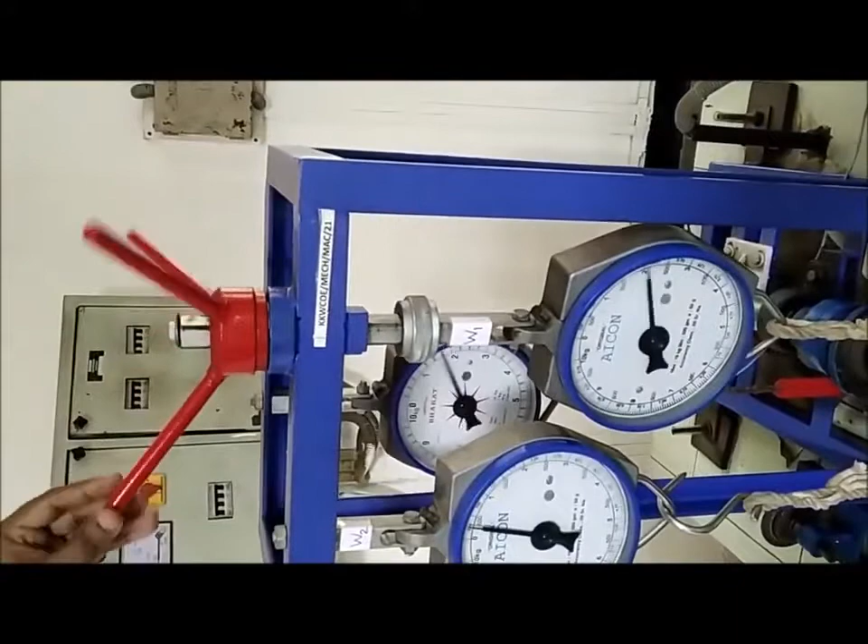Now how we will go for next reading? This nut is there, we will operate it further. So that rope will be pressed against drum, and here we can take reading for W1, then we can take reading for W2, we can take reading for S. And from here we can take reading for input speed. And if we will move this knob in upward direction, we can take reading for output speed, and we can even take reading for current.

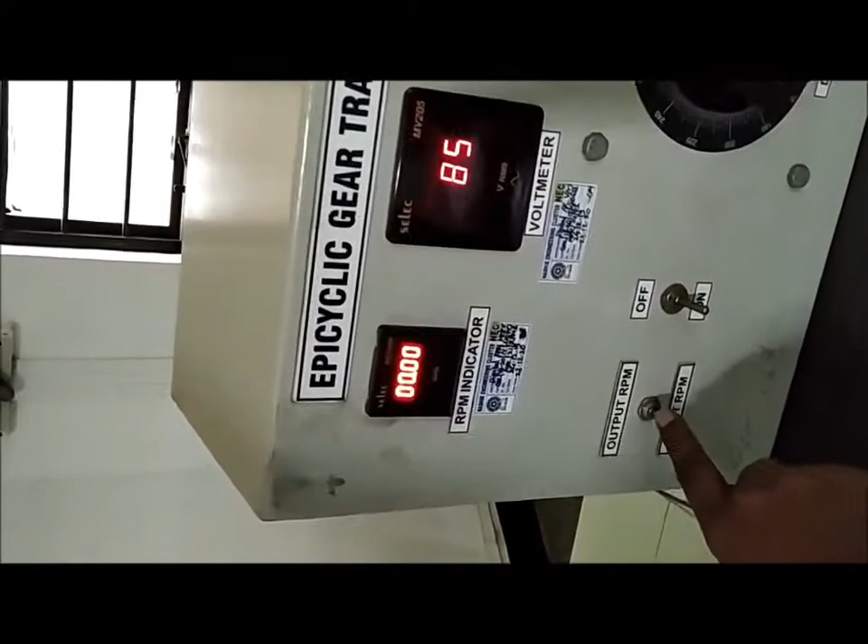Similarly, what we will do for next reading? Once again, we can operate this nut. So again, rope will be pressed against drum, and here you can notice these values are increasing. Value of W1 is increasing, value of W1 is increased, value of W2 is also increased, value of S is also increased. And here also now we can go for input speed and output speed, and we can also take reading for current. So likewise, if I will move it in downward direction, I will get speed at input, and if it will be moved in upward direction, we will get speed at output.

So likewise, what we can do, we can operate this nut and we can go for next reading. So this is how we will repeat the procedure, and we will take 5 to 6 readings.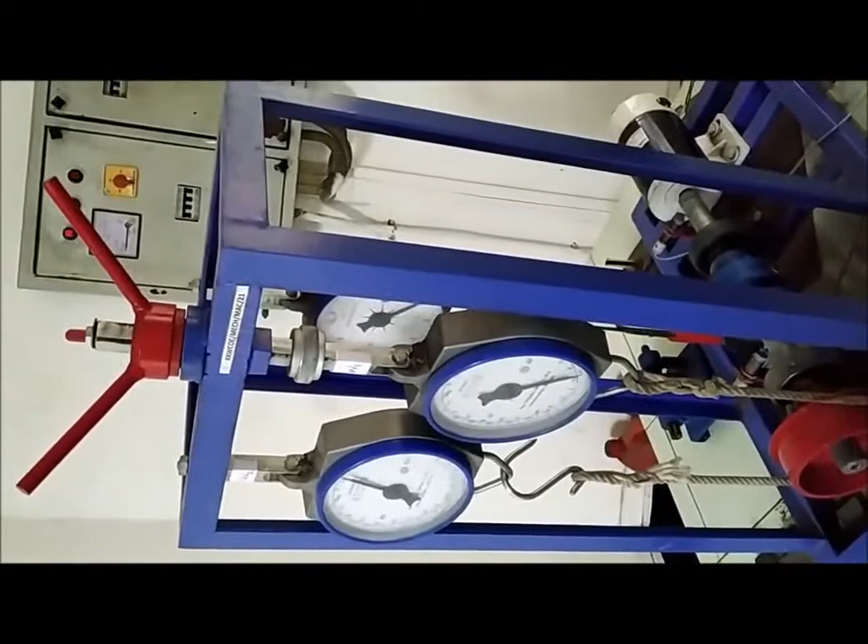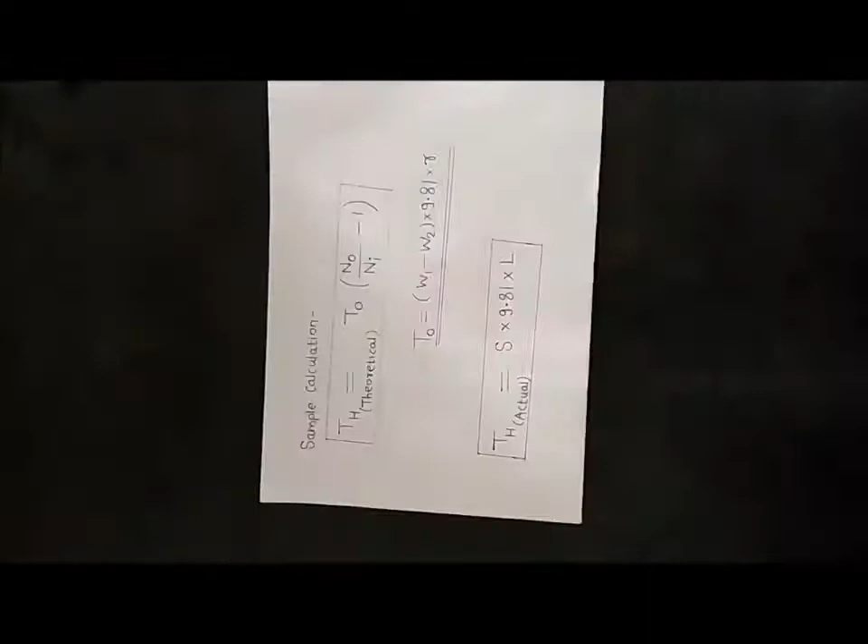Now we will go for calculation part. What we have to find is holding torque. Holding torque is associated with that element which is fixed. In this arrangement, ring gear is fixed. So this is the holding torque. T subscript H is the notation for holding torque, and that holding torque is related with ring gear.

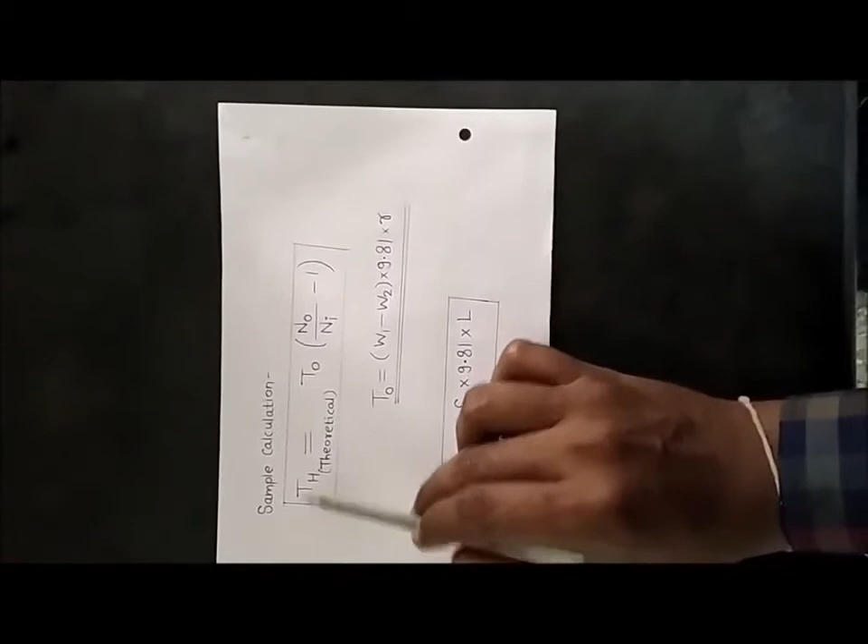So how we can find theoretical holding torque? For that, we are going to use this notation: TO, that is torque at output, multiplied by NO divided by NI. N subscript O is output speed and N subscript I is input speed. Minus 1, and we are multiplying this entire bracket by TO.

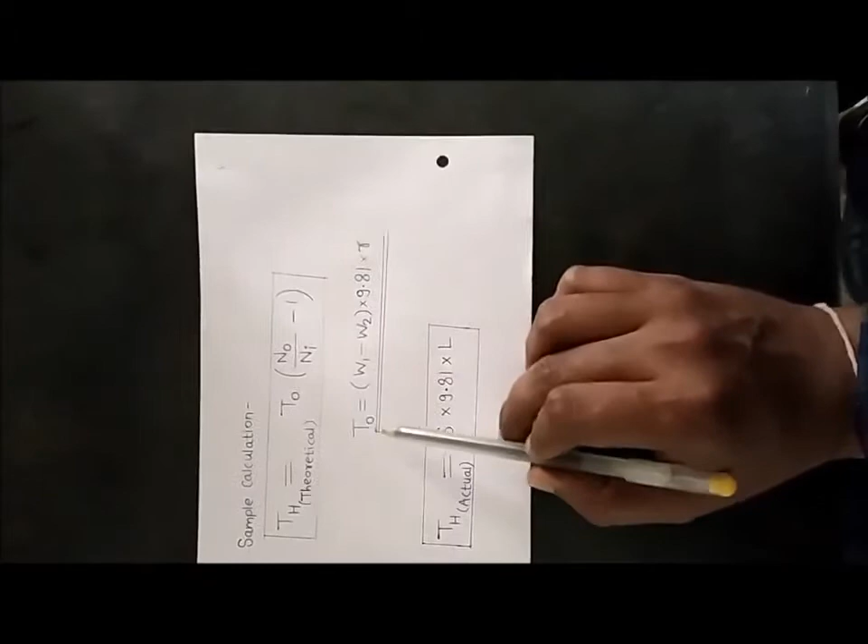And how we can find this TO? For that we can use this relation, W1 minus W2, that is tension on tight side minus tension on slack side, multiply it by 9.81, then multiply it by radius. So this is the output torque because the drum was mounted on output side, we are knowing it. So from rope brake arrangement, we can find output torque by using this relation. And once we will get this value, we can use this value here to find theoretical holding torque. Now we can even find actual holding torque.

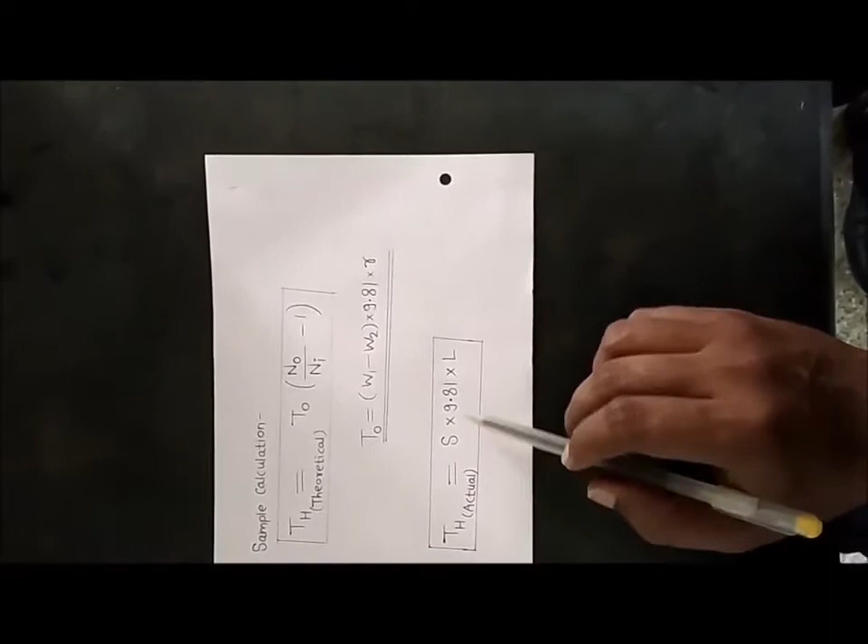For that, we will use this relation S into 9.81 into L. What is S? It is spring balance reading. It is in kg, that's why we are multiplying it by 9.81. And here also you can notice, while calculating TO, we have multiplied W1 and W2 by 9.81 because that load is in kg, so we will convert it into Newton. Now, while finding actual holding torque, we will take spring balance reading, multiply it by 9.81, then multiply it by L.

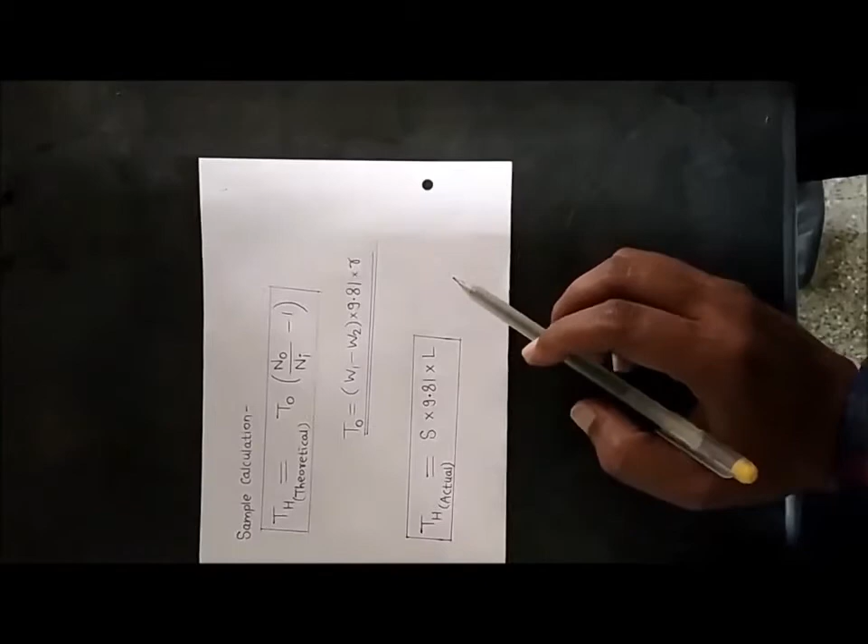What is L? It is torque arm length. We are knowing value of this torque arm length, we have already seen it. Value of torque arm length is 0.06 meter, and we are knowing value of R, effective radius of drum, it is 0.08 meter.

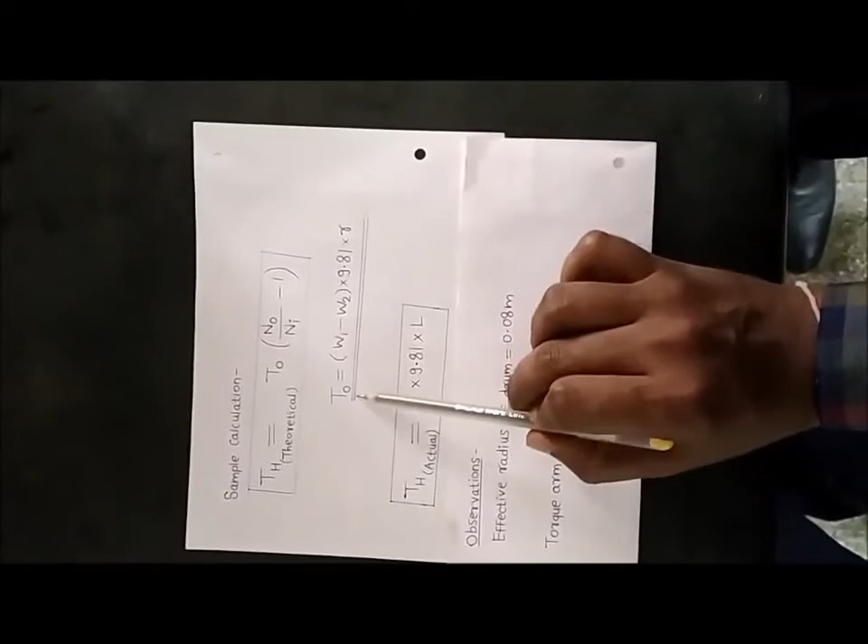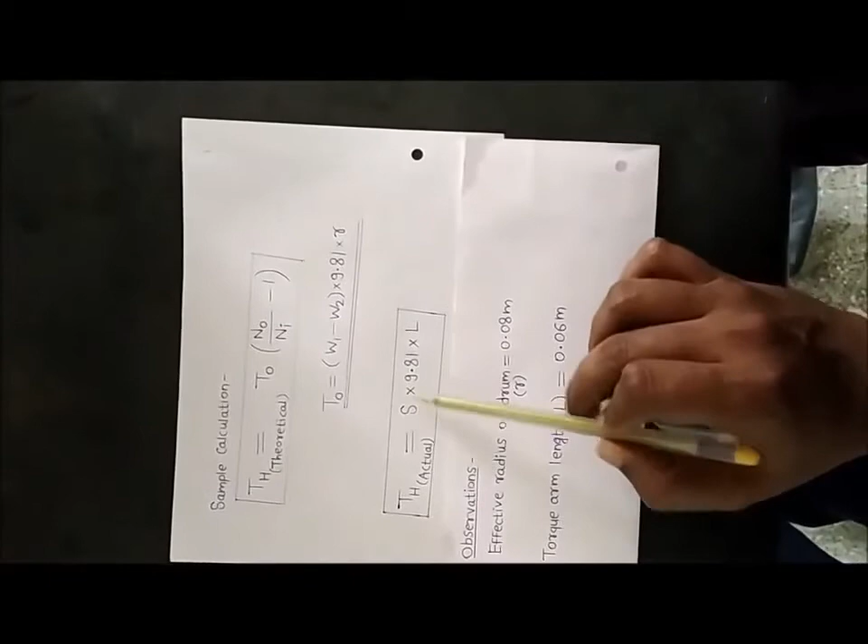So what we have to do, we will take first reading. From that reading we can get input speed, output speed, and values of W1 and W2. As we are knowing W1 and W2, we can find output torque, and use it along with input speed and output speed from first reading to get theoretical holding torque. We are also knowing spring balance reading. This L, torque arm length, will be same for every reading, along with effective radius of drum. So we can use this value of S and find actual holding torque, and compare them. Now we will go for calculation of first reading.

We have to find theoretical holding torque, TO into NO upon NI minus 1. Output speed, NO is 126, so we will write 126 here. NI, speed at input, it is 688, so we will write 688 here. Now we will find output torque.

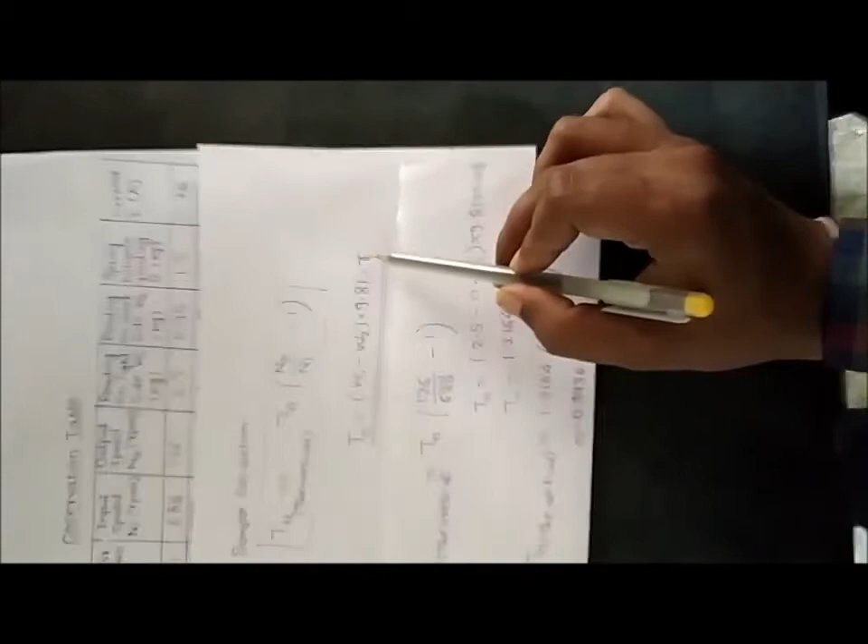For that we can use this relation, W1 minus W2. W1 is 2.5, W2 is 0.95, multiplied by 9.81, multiplied by radius, and radius is 0.08, effective radius of the drum. Now we can go for this calculation, then we will get value of output torque, it is 1.2164. We will put this value here, so theoretical holding torque will be 1.2164 multiplied by this relation, and we will get value minus 0.9936 Newton meter. So this is theoretical holding torque.

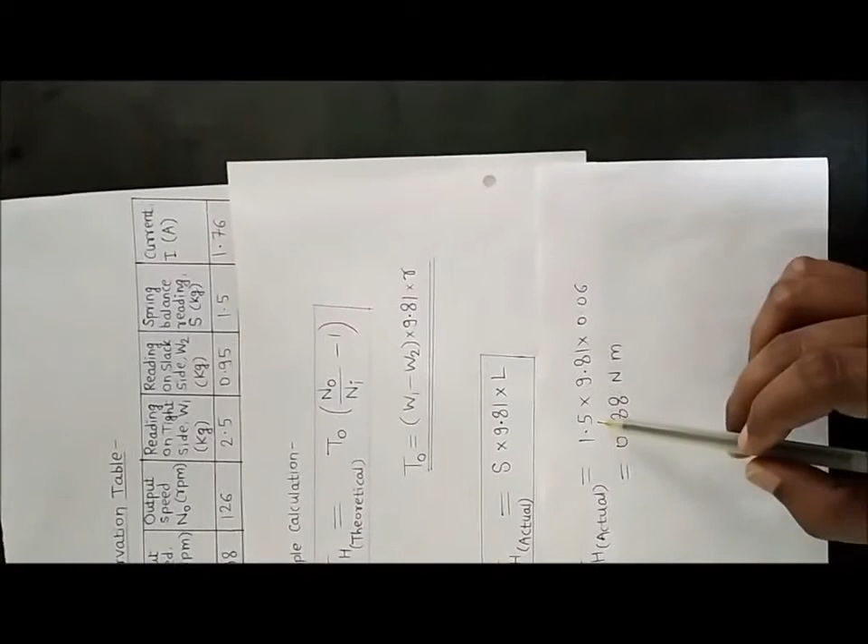Now we will calculate actual holding torque. Our relation is S into 9.81 into L. We are knowing value of L, it is 0.06 meter. Value of S we can take from here, it is 1.5. So we will take this value, 1.5 into 9.81 into 0.06, it is 0.88 Newton meter.

So this is actual holding torque, and theoretical holding torque was minus 0.9936. That minus sign is there due to direction, but you can notice magnitude is almost same.

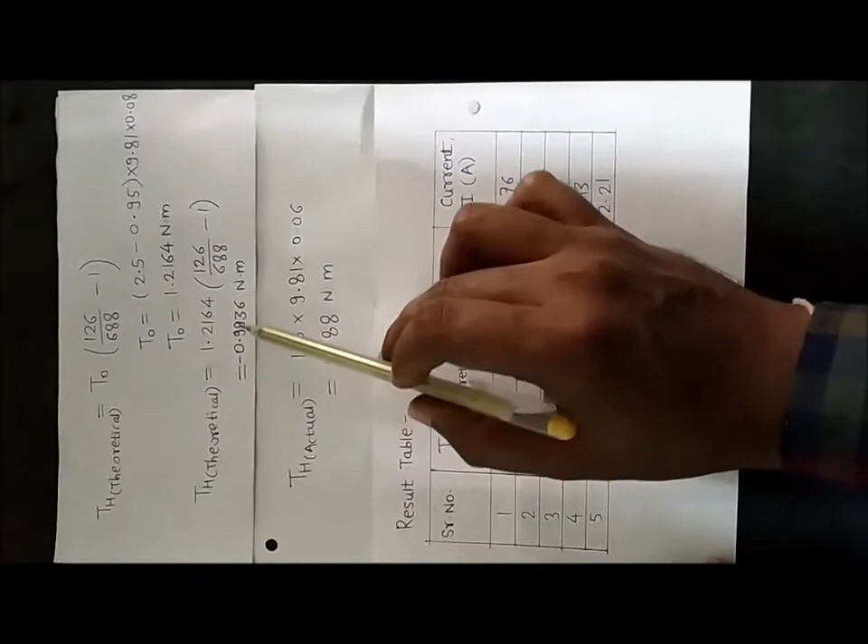Now we will put these values in result table. Obtained theoretical holding torque is minus 0.9936, so we will write minus 0.99, and actual holding torque is 0.88, so we will write it here, and current we can take from observation table, it is 1.76. In result table you can notice first column is serial number, next column is theoretical holding torque, then actual holding torque, and then current. So we have already calculated theoretical holding torque and actual holding torque, so we will put these values here.

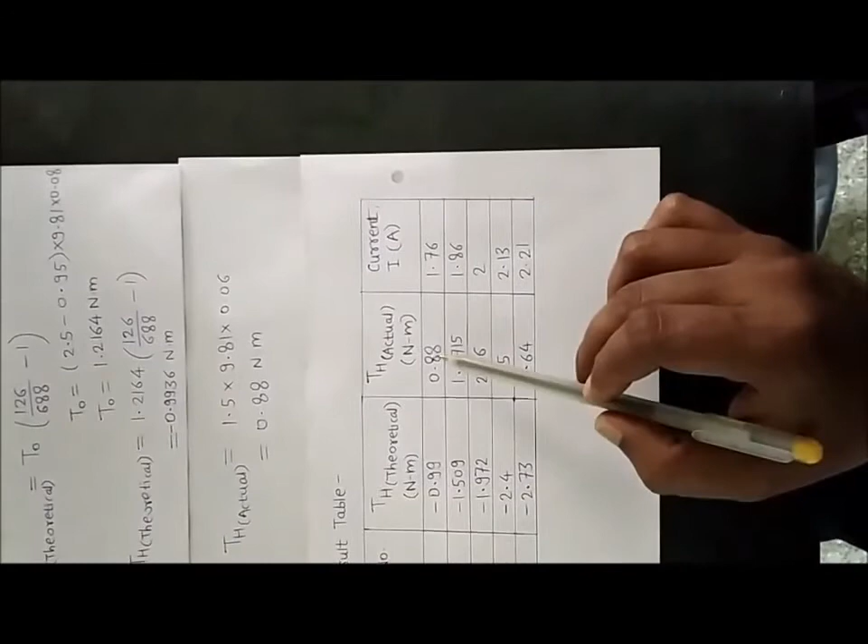Similarly, we will calculate values for other readings, and these values are written here. So what we can conclude from this? Theoretical holding torque and actual holding torque is almost same. You can notice 1.5, 1.4, 1.9, 2.06, 2.4, 2.5 means theoretical holding torque and actual holding torque is almost same.

And you can notice value of current, it is continuously increasing. Why? Because we are operating nut, that rope is getting pressed on the drum, means load on output is continuously increasing. As load on output increases, motor will have tendency to fetch more and more current, that's why value of current is increasing. So what we can conclude is theoretical holding torque and actual holding torque is almost same, and as load on output increases, motor will fetch more and more current.